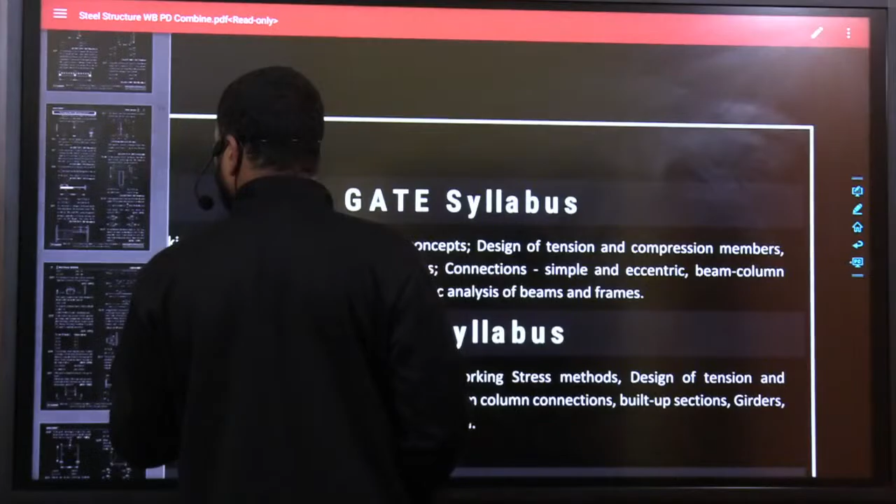Good evening guys. Hi Shihana, good evening. Pradeep, good evening. Two people came, 7 people are watching. One is me, another is Pradeep, another one is Shihana. Who are the other guys? Please do comment. Please keep it up for the sake of God. What do I have to keep up, Suhai? I don't know what I have to keep up. Good evening. Who is that guy? Good evening.

Kuldeep Kumar, good evening. Am I audible guys? And is the visibility good? Please do comment, whether I am audible or not. All perfect? Yeah. Visibility not? What happened to visibility? Anything wrong? I think I am visible here. I can see myself over there. What is the problem with the visibility? Light?

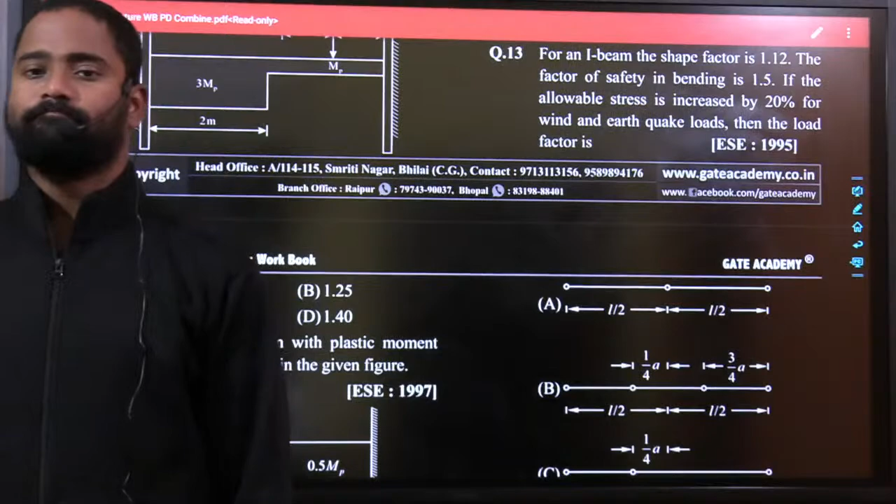I think many people were not there in the morning's class. Sorry for the disturbance. Visible? The writing on the board is not visible. Fine, I'll discuss about that.

Okay, so till now we have seen how to find out shape factor, how to find out plastic moment capacity, how to find out elastic modulus, and how to find out plastic modulus. In the morning I took half an hour of class because many people were not there. As I have already discussed, morning 2 hours, evening 2 hours will be your timetable, 7 to 9. Please like and share with as many people as possible, because I have hardly seen any people in the morning.

Now we'll go for the next type of questions that can be asked. The idea is to find out the collapse load. There are different ways to find out the collapse load, but the major thing, if you want to find out the collapse load, always use the principle of virtual work. We'll be using the principle of virtual work to find out the collapse load.

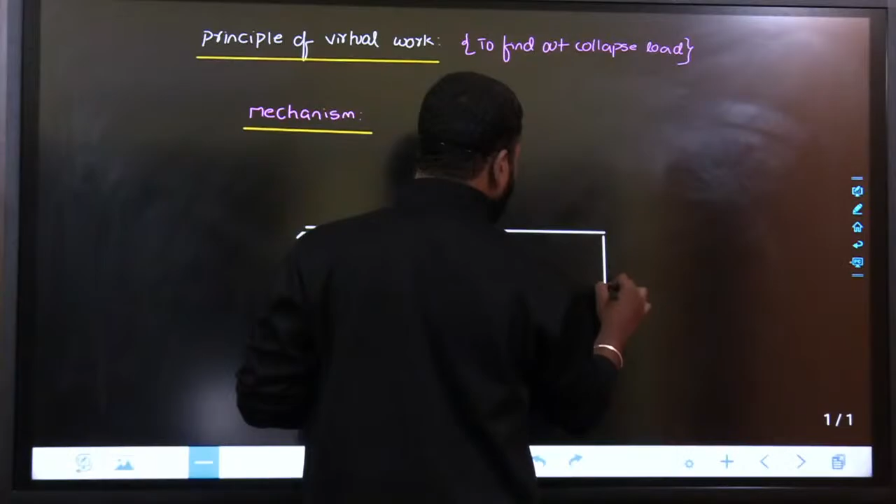To find out collapse load. Before that, we'll see what exactly a mechanism is. Whenever you take any structure, let us say this is a simply supported beam subjected to some loading P.

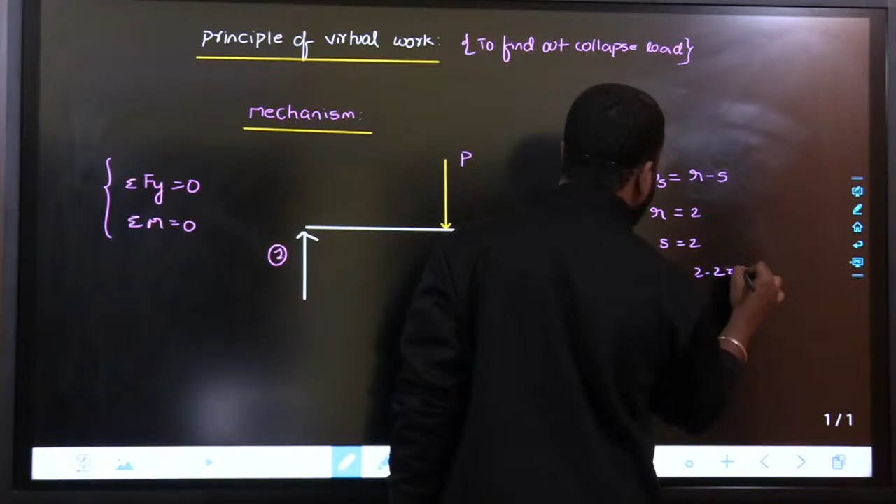What is the static indeterminacy of this structure? ds would be equal to number of reactions minus number of equilibrium equations. If it is subjected to vertical load, then there are only two equilibrium equations: sigma Fy equals 0 and summation of moment equals 0. Generally sigma Fx equals 0 is also an equilibrium equation, but for only vertical load there are only two. And the number of reactions here, this is 1, this is also 1. R equals 2, S equals 2. ds equals 2 minus 2, that equals 0. So ds equals 0. This is statically determinate and stable.

If it is statically determinate and stable, in order to convert this into a mechanism, in order to make it unstable, how many hinges are to be formed? Number of hinges required to convert a structure into a mechanism. That means we are going to convert a stable structure into an unstable structure. Number of hinges required, n, would be equal to ds plus 1, that is 0 plus 1. 1 hinge is required to convert the whole structure into a mechanism.

That means if you take this as a structure, now it is a stable structure. If you keep on increasing the load, what happens? Initially it will bend, right? It will keep on bending like this, and there comes a stage where it will totally collapse. The beam would be totally collapsing like this. So this is how it would be collapsed. That means indirectly a hinge is formed here.

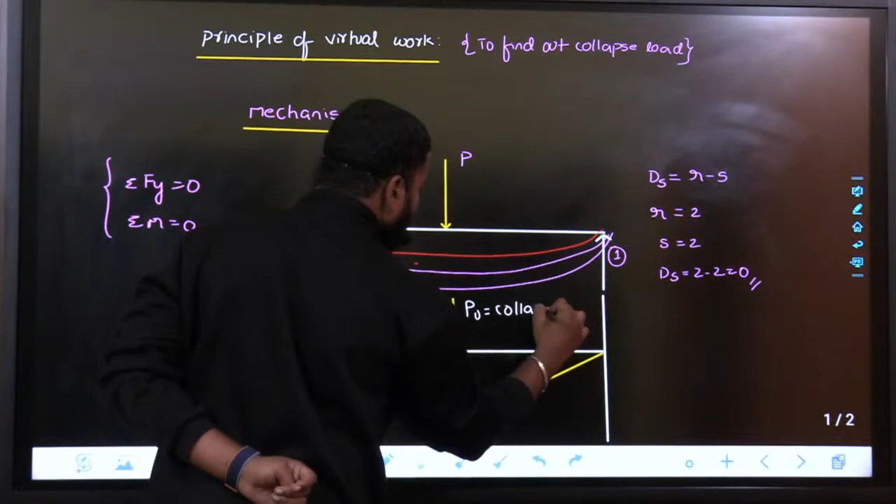The load at which the beam collapses is called the collapse load. You keep on increasing the load and finally it collapses. It bends, and if it reaches up to the plastic moment capacity, it collapses. So this is what you'll be saying: number of hinges required to convert a structure into a mechanism. Mechanism means we are making the structure unstable.

Fine. So here the number of hinges required to convert a structure into a mechanism is generally ds plus 1, where ds is the static indeterminacy. So here the number of hinges required is 1. And the possibility of formation, the location of hinges. Where will hinges form?

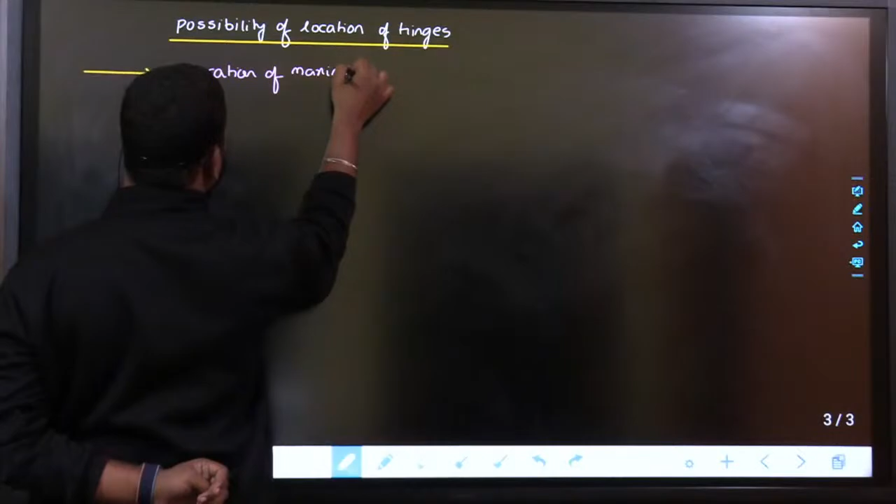So generally, the possible locations of hinges. The first one is the place where the bending moment is maximum. Hinges can be formed at the location of maximum bending moment. Fine. At fixed supports, and under point loads. It can form under point loads.

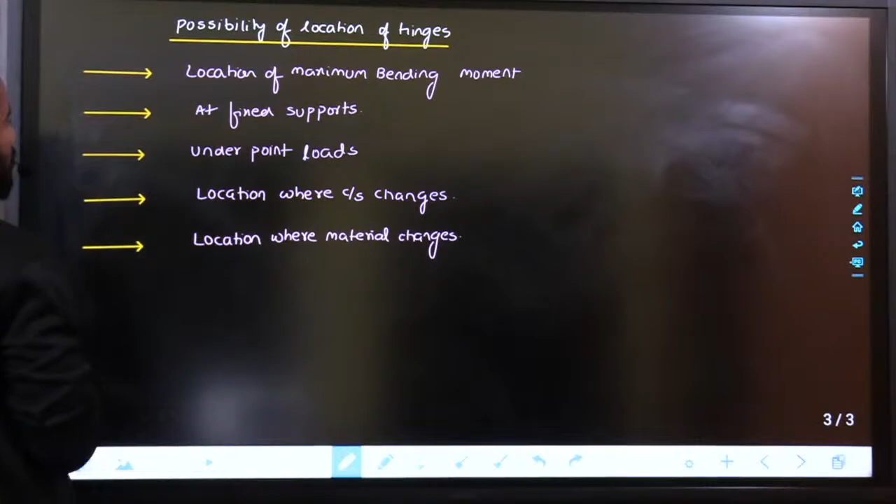Next, locations where the cross section changes, and locations where the material changes. So these are the points: location of maximum bending moment at fixed supports, under point loads, locations where the cross section changes, and locations where the material changes. So these are the possible locations of hinges.

Where will the hinges form? So these are the possible locations of hinges. If you see here, the bending moment is maximum here, and the point load is also here, so the possible location of a hinge would be here. If that hinge is formed, this structure becomes unstable. That means the structure is converted into a mechanism. Fine. Here the structure is converted into a mechanism.

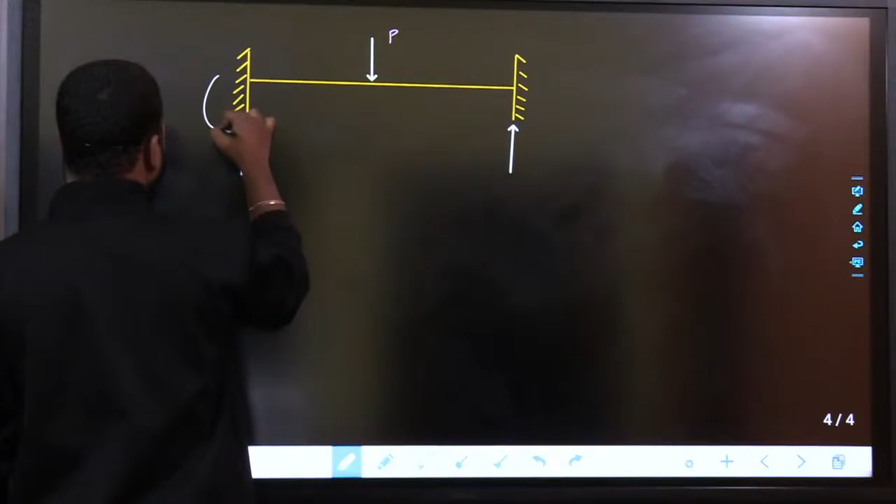Fine. Suppose I take the example of a fixed beam, subjected to a vertical point load P. One reaction will be like this, another reaction like this, and the moments would be something like this. ds would be equal to r minus s. Number of reactions equals 4, number of equilibrium equations, as we have already discussed, equals 2. So the number of hinges required to convert the structure into a mechanism is ds plus 1, that is 2 plus 1, which equals 3. 3 hinges have to be formed.

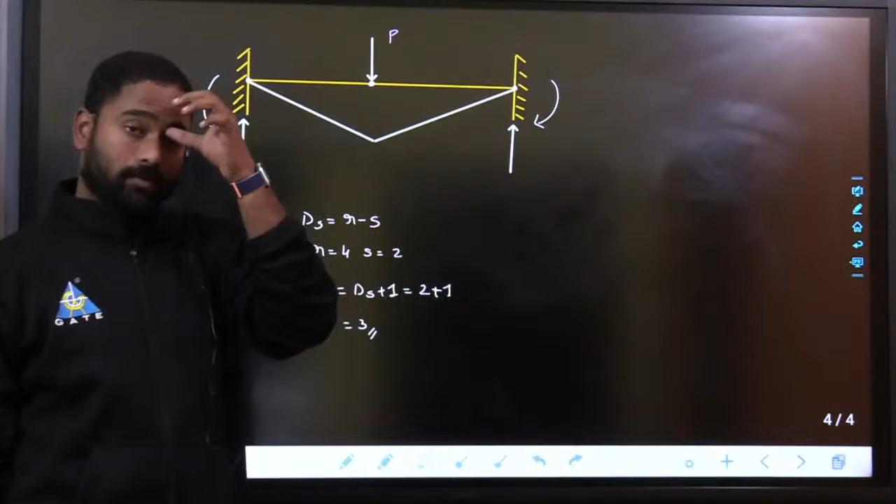What are the possible locations? I told you, first, hinges can form at fixed supports. So here 2 hinges will form, and another hinge might form under the load, that is, at the location of maximum bending moment. That means if the structure fails, it will fail something like this. 3 hinges will be formed so that the structure is converted into a mechanism. Fine.

Fine. Now the next one is how to find out the collapse load. I told you we will be using the principle of virtual work to find the collapse loads. Collapse load means the load at which the material fails or the structure is converted into a mechanism. You can use the equilibrium concept, the mechanism concept, and other concepts, but first I will discuss how to find the collapse loads using the principle of virtual work. What does the principle of virtual work say?

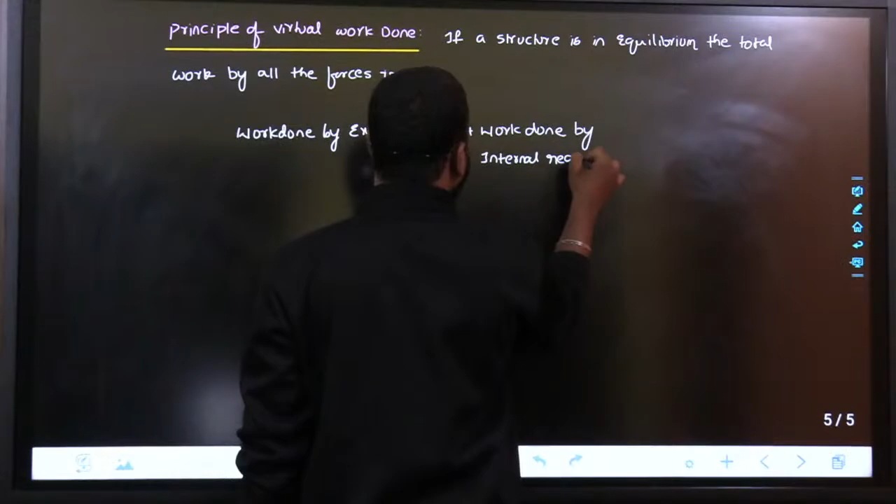If a structure is in equilibrium, then the total work done by all the forces is 0. That means work done by external forces plus work done by internal reactions equals 0. Work done by external forces plus work done by internal reactions equals 0. This is the principle of virtual work.

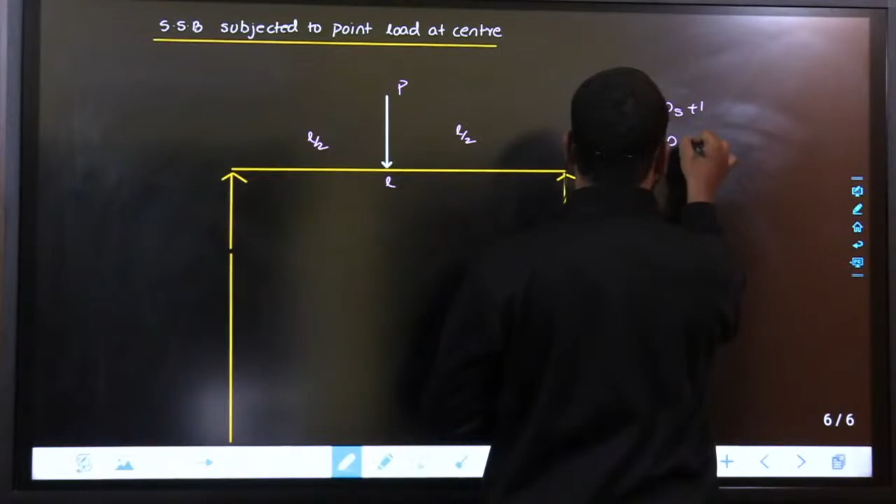Now how will you use this principle of virtual work? I'll take a simply supported beam subjected to a point load at the center. I am just considering a simply supported beam of length L, subjected to a point load P at the center, so this is L by 2, and this is also L by 2. The number of hinges required to convert the structure into a mechanism would be N equals ds plus 1, and this is a statically determinate structure, so 0 plus 1, which equals 1. The number of hinges required to be formed is 1.

Fine, number of hinges required to be formed is 1. Then what you can say over here is, hinge will be formed, let us say at C. If I take this as A, C, B, hinge will form at C. Just before collapse, it would be something like this. It will try to rotate something like this just before collapse. Fine, a hinge is formed over here.

That means the moment resisting capacity would be MP. This is MP, this is also MP, and let us say this is L by 2, this is L by 2, this is theta, this is also theta. Fine. So what is external work done? Load multiplied with distance in the direction of the applied load. If this is L by 2, this is theta, I can write this as L by 2 times theta.

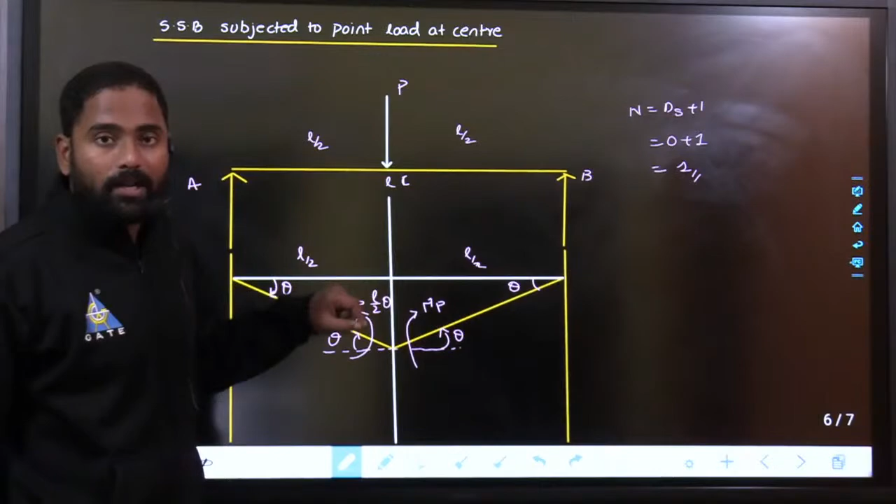If this is theta, this is L by 2. If I take this as y, tan theta equals y upon L by 2. For small values of theta, tan theta is approximately equal to theta. Theta equals y upon L by 2. This implies y equals L theta by 2. So this is L theta upon 2. Fine, this distance is L by 2 times theta or L theta upon 2. So external work done by external forces is Pu into L by 2 times theta, right?

Work done by external force equals Pu or P multiplied with L by 2 times theta. Okay, and what is work done by internal force? Work done by internal force is MP is anti-clockwise and theta is clockwise, so it is opposite. MP into theta, both are opposite, so minus MP into theta and minus MP into theta.

See, if load is trying to push it like this, the internal rotation, that means capacity, will try to resist this. If this tries to rotate like this, this tries to resist. That is the reason here it is clockwise moment, here it is anti-clockwise moment, whereas rotation is clockwise here, rotation is anti-clockwise here. So internal work is minus MP into theta minus MP into theta, because moment and theta are in opposite direction.

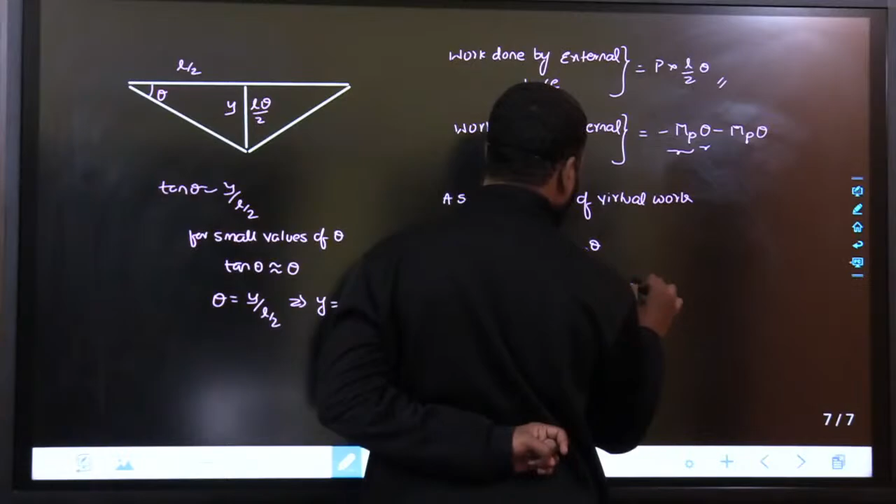So as per principle of virtual work, what I can write is P multiplied with L by 2 times theta equals 2 MP theta. So P equals 4 MP upon L. Collapse load is 4 MP upon L, whereas MP equals plastic moment capacity. P equals 4 MP upon L. This is the collapse load.

Plastic moment capacity is constant for a given section, right? It depends upon Fy multiplied with Zp, constant for a given cross sectional area. Fine. So this is how we are going to find out the collapse load. So whenever any problem is given to you, try to use principle of virtual work. Work done by external forces equals work done by internal forces.

What is work done by external forces? For that, first you should find out number of hinges that is to be formed to convert a structure into mechanism. Once this is converted, work done by external forces is P into L by 2 times theta. Work done by internal forces or reactions is minus MP into theta minus MP into theta. This is internal reactions. So as per the principle of virtual work, the collapse load is given as 4 MP upon L. This is for simply supported beam subjected to point load at the center. Any doubts in this? You can ask me.

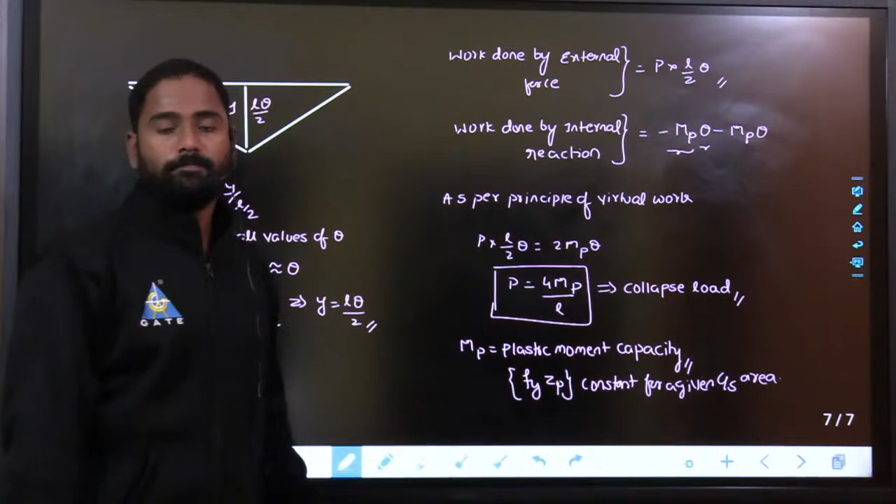Good evening. Only 4 people are watching, so you are getting bored.

Work done by internal reactions again. See Prithvi, if a load is being applied like this, load tries to rotate this. Fine. Internal reaction, that means there is some moment. If a load is being applied, I am trying to rotate like this. If there is any fixity over here, I'll resist it. That means if you try to rotate it like this, I'll resist it. So here a moment is developed, right? That is plastic moment capacity, your capacity.

The capacity of beam is generated here, MP, right? So MP multiplied with theta, this is clockwise moment and there is anti-clockwise rotation. So work done by internal reactions is negative, because MP and theta are in opposite direction. Generally work done by any force is load multiplied with distance traveled. So MP multiplied with theta, MP multiplied with theta. Here because there are 2 reactions that are developed, so 2 MP into theta. Any doubts?

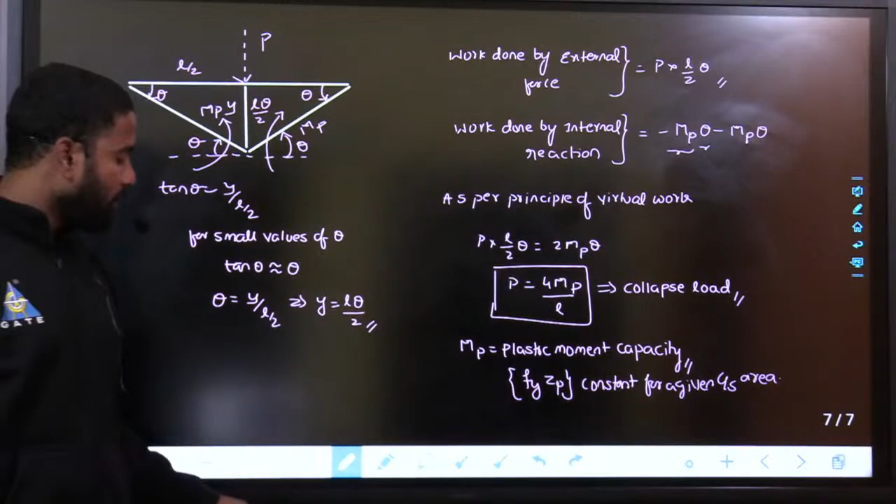Only 4 people are watching. Yeah, thank you very much.

Any doubts, guys? Got it?

No doubts? Fine. In the same line, if you want to find out for a simply supported beam subjected to UDL, W kilonewton per meter, let us say. Then the number of hinges required to convert this into a mechanism is n equals ds plus 1. ds anyway equals 0, so n equals 0 plus 1, so n equals 1. The number of hinges required to be formed is 1.

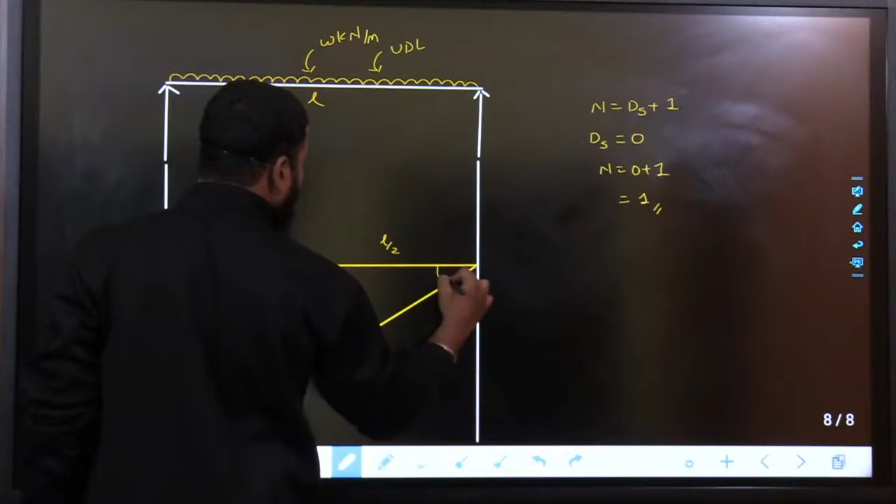Generally moment will be more at the center. What is that? WL square upon 8. So the hinge will form exactly at the center. Fine. So if this is L, this is L by 2, this is also L by 2, this is theta, this is also theta rotation. But here the only thing is the load is W kilonewton per meter.

So if you want to find out work done by external force, that is load multiplied with this whole area, you have to take. This whole area, that means this is L by 2 times theta. So external work done equals load multiplied with area. Area under the load is half multiplied with L multiplied with L by 2 theta.

And internal work done would be MP times theta plus MP times theta. Fine. So WL square by 4 equals 2 MP theta. So W would be equal to 8 MP upon L square. Therefore the collapse load for a simply supported beam subjected to UDL is 8 MP upon L square.

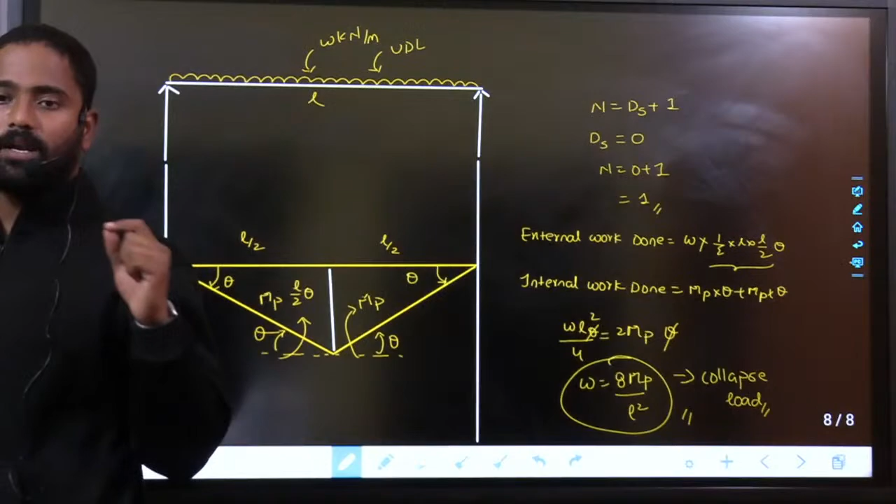So any doubts over here? Prithviraj is saying no doubt. Hey Suhani, rather your videos are much more helpful for us. Please make more videos on this subject and complete our ERC syllabus, please. Humble request. Written on board is not visible, sir. Not clearly visible, blurred. Why is it blurred here? Lighting effect is high.

Anyway guys, any doubts in this? This is your case 2, simply supported beam subjected to UDL. Case 1, simply supported beam subjected to point load. Case 2, simply supported beam with UDL. Next, case 3. Case 3 is simply supported beam

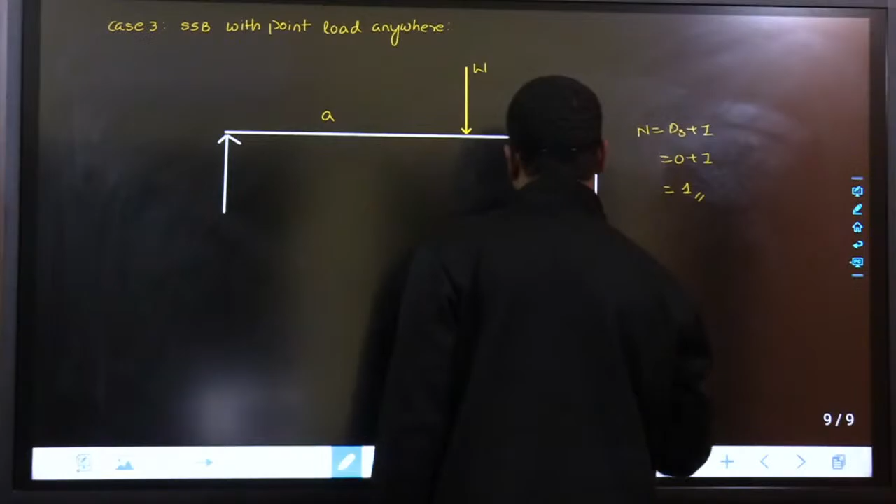with point load anywhere. Okay, simply supported beam with point load anywhere. How exactly are you going to find that out? Let us say the point load is somewhere here, this is A, this is B, capital W. Number of hinges required to convert this into a mechanism, n equals ds plus 1, ds equals 0, plus 1, that equals 1. n equals 1, not a bigger issue.

Fine. So if n equals 1, the hinge will be formed under the load. Always remember, maximum bending moment will be under the load only. So the hinge will form under the load. Fine. So if hinges form something like this, this is A, this is B. Now the angles will not be the same. This will be alpha, this will be beta. So this is A alpha, this can also be B beta. And plastic moment capacity MP will be like this. If this is alpha, this is also alpha, this is beta, this is also beta.

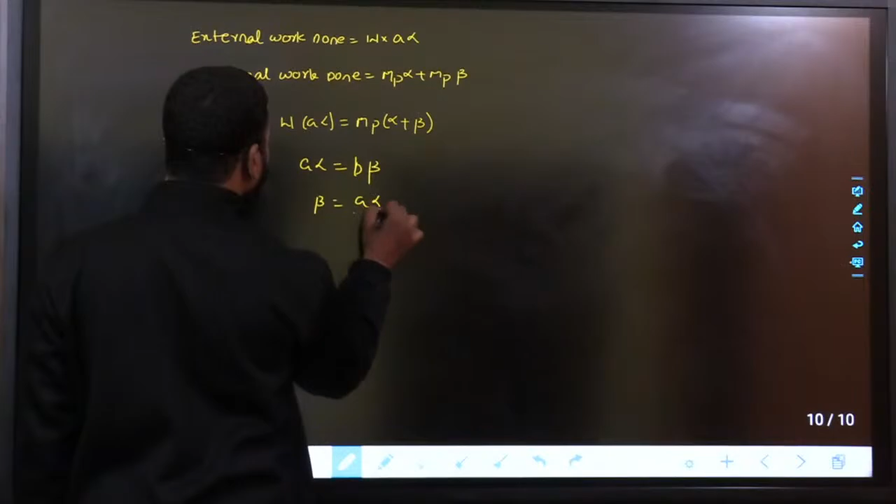So what is external work done? External work done would be equal to load multiplied with distance travelled, that is A alpha. Internal work done would be equal to MP times alpha plus MP times beta. So W multiplied with A alpha equals MP times alpha plus beta. And what you can write is A alpha equals B beta, so beta would be equal to A alpha by B. W into A alpha equals MP multiplied with alpha plus A alpha by B.

W would be equal to MP multiplied with (b plus a) upon ab. b plus a is L, so MP L upon ab. Fine. This is how you will calculate W. This is the collapse load for a simply supported beam with point load anywhere. Any doubts in this?

You can ask me. Any doubts? Please go ahead and ask me. Any doubts, guys? Only 6 people are watching. I don't know why you got bored of it. So please do comment. Good evening, Prudviraj. Only Prudviraj is constantly messaging me. What about the other guys? Please do comment, guys.

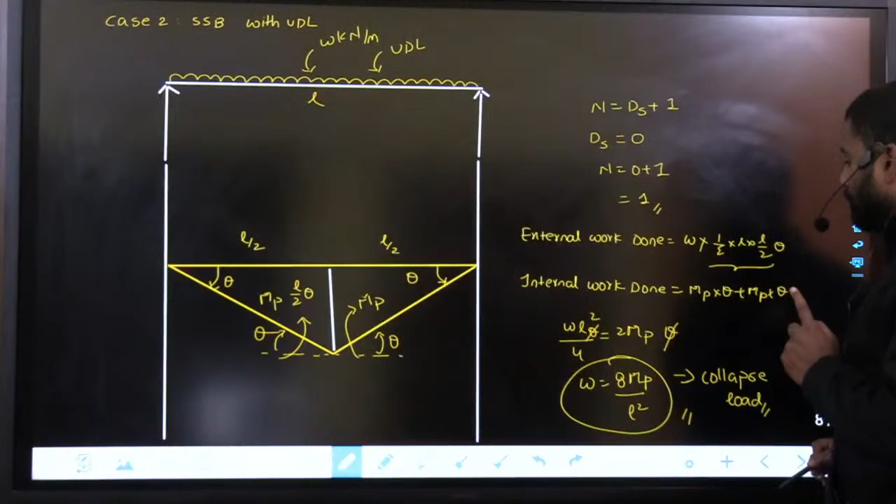So in a simply supported beam with point load at the center, collapse load is 4 MP upon L. With uniformly distributed load, 8 MP upon L square. With point load anywhere, MP L upon a into b. Fine. Simply supported beam is completed. Next we go for fixed beam.

So fixed beam, case 1, fixed beam with point load at center. Right? So fixed beam with point load at center. P will be acting over here. This is load P. Now this is a fixed beam.

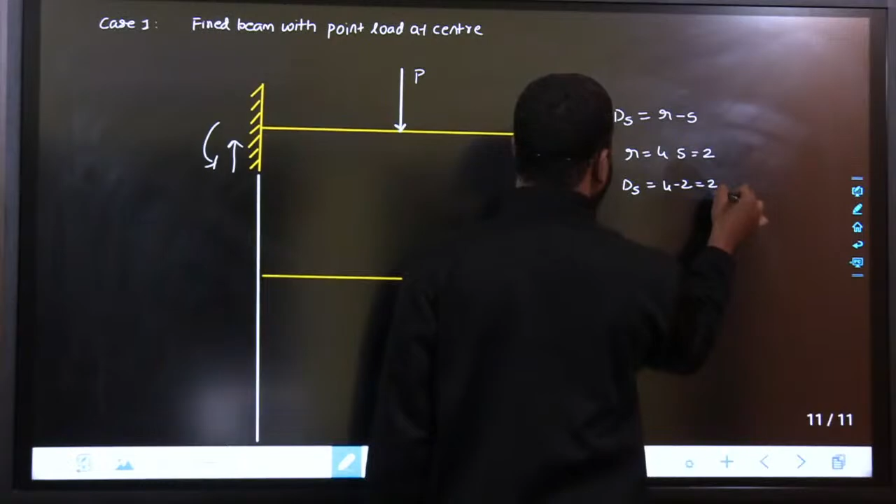So what is static indeterminacy for a fixed beam subjected to vertical loads only? Here there will be one reaction, here one reaction, here one reaction. Number of reactions is 4, number of equilibrium equations equals 2, so Ds is 4 minus 2, that is 2. Number of hinges required to be formed is Ds plus 1, that is 2 plus 1, 3. 3 hinges are to be formed.

And where will these 3 hinges be formed? If you remember, I told you hinges will be formed at fixed supports, under the load, and at maximum bending moment. And if there is any change in cross section or any change in the material, those points you have to check. Now if this is load P exactly at center, L by 2, L by 2, it will form at A, B, C. Plastic hinges will form at A, B and C.

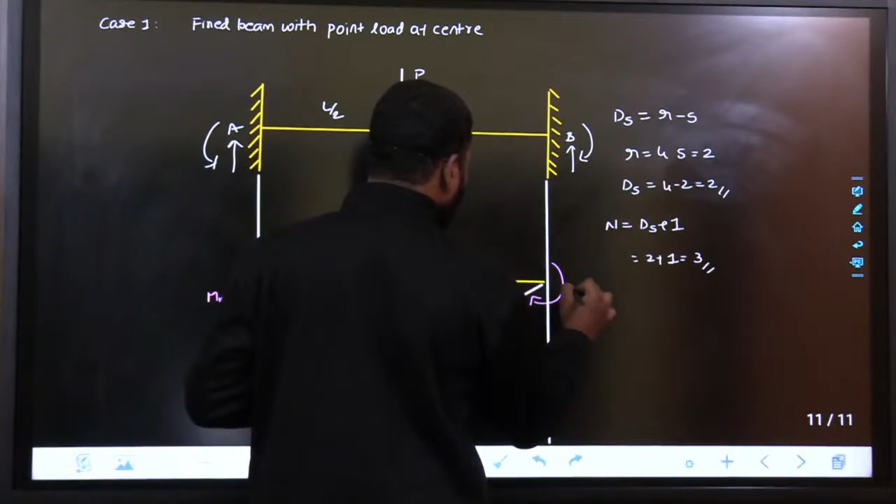That means the final collapse diagram would be something like this. Here there is a plastic moment capacity of MP, here another MP, here MP, and here MP that will be generated. If this is theta, this is also theta, then this would be L by 2 times theta. Why? A hinge is developed here, a hinge is developed here, so plastic moment capacities will be developed here. This load tries to rotate it like this, and the fixed support tries to resist it. If it is a hinge, it is easy to rotate. That's why moments are developed over here, whereas here moments are developed at different locations. I'll say this as theta, this also as theta.

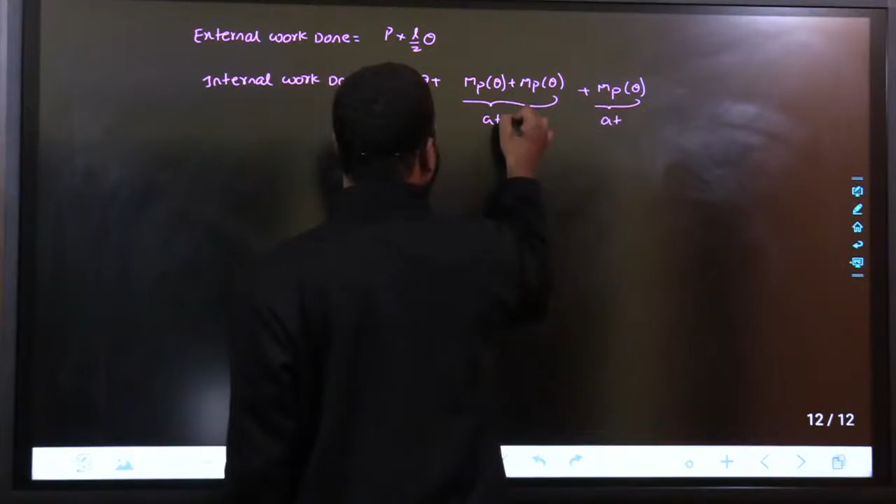So what would be the external work done? External work done equals P multiplied with L by 2 times theta. Internal work done equals MP times theta at A, MP times theta plus MP times theta at C, plus MP times theta at B. So totally, P multiplied with L by 2 times theta equals 1, 2, 3, 4, that equals 4 MP into theta. So P would be equal to 8 MP upon L. So the collapse load for a fixed beam subjected to point load at center is 8 MP by L. If it is a simply supported beam, then it is 4 MP upon L.

If it is a fixed beam, then it is 8 MP upon L. So collapse load for a fixed beam subjected to point load at center is 8 MP upon L. Fine. So this is how you will calculate. And how the hinges are formed, that means in what way hinges are formed, that depends actually on bending moment diagram.

If it is a fixed beam subjected to point load at center, from your strength of materials concept, the moments developed at the ends, fixed end moments, would be WL upon 8 and WL upon 8. This is fixed end moments, P or W, whatever that is. The fixed end moments that is developed is WL by 8.

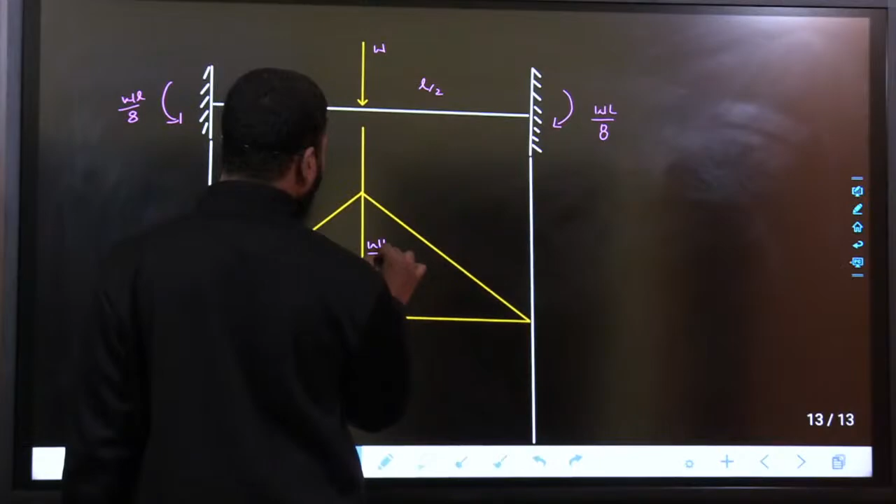If there is no fixed supports, if there is only hinge support, then bending moment diagram would be how much? At the center it is WL by 4, right? This is BMD. Now the moments developed because of load applied, the moments developed at the ends is WL by 8. If this is positive bending moment, this is negative. Because of load it bends like this, sagging, and because of end moments it is hogging, negative. Fine. So this is negative, WL upon 8, and this is also WL upon 8.

The positive bending moment, what would be this value? WL by 4 minus WL upon 8. This would be WL upon 8. This is maximum positive bending moment and this is maximum negative bending moment. This is from your bending moment diagram concept, which you might have studied in your structure analysis. This triangle is a BMD with point load at the center for an SSB, simply supported beam.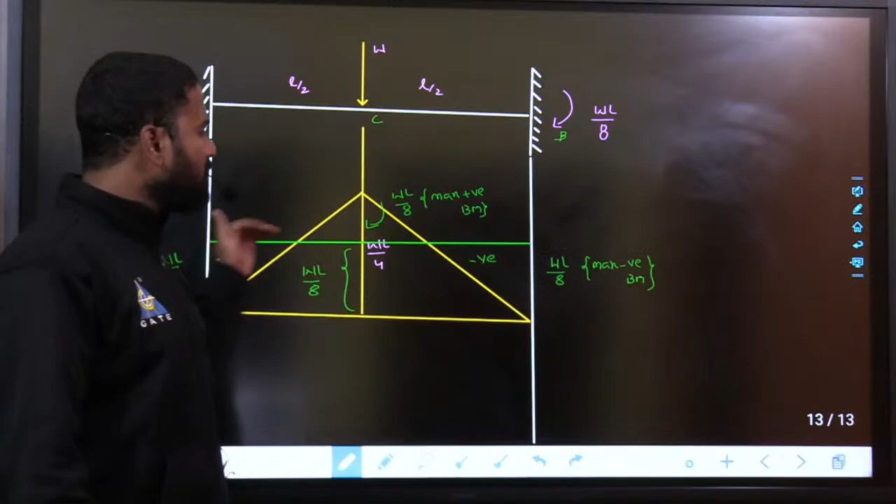If you are providing the fixity at the ends, then you will be adding these moments, minus WL by 8. So maximum negative bending moment at A and B is WL by 8. At C, the maximum positive bending moment is WL by 8. At all the 3 points, hinges will be formed together. That means maximum bending moment is same at 3 locations. So all three hinges will form together.

At A, B and C, since maximum negative bending moment equals maximum positive bending moment equals WL upon 8. So since bending moments are same, when you keep on increasing the load, at the failure all hinges will be formed and failure occurs. And what is the collapse load? Collapse load is 8 MP upon L. Fine. Any doubts in this? You can ask me.

Namaskaram. You are late to the class.

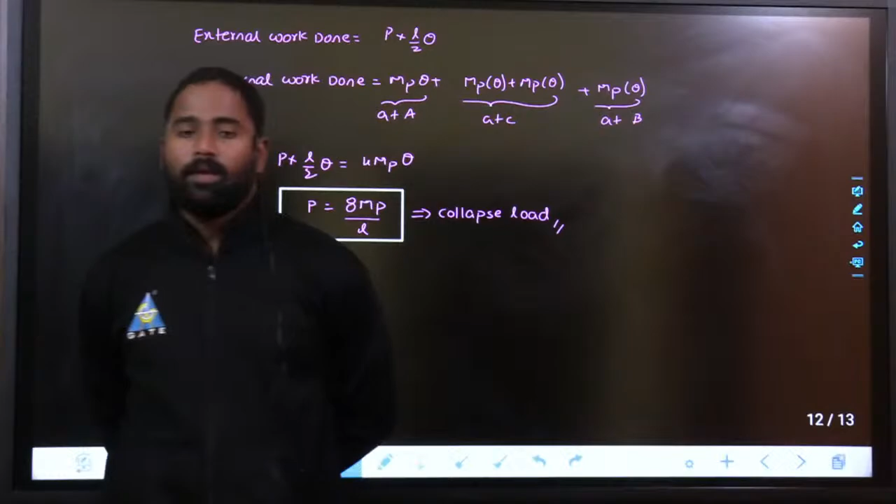See, the concept is very much simple. Whenever, just find out number of hinges required to be formed and location of hinges. So here these are the three locations of hinges, and finally you can find out what is the collapse load that is required. And hinges will be formed simultaneously at A, B and C.

Any doubts, guys? Only Prithviraj is commenting. What about the other guys? If you are having any doubts, please go ahead and ask now, because this is the time where you can clear the doubts. If you don't clear doubts now, then it would be difficult. If you want me to repeat, I'll repeat. Since it is starting, I know it is difficult to take, be with the pace. So if you are having any doubts, please go ahead and ask.

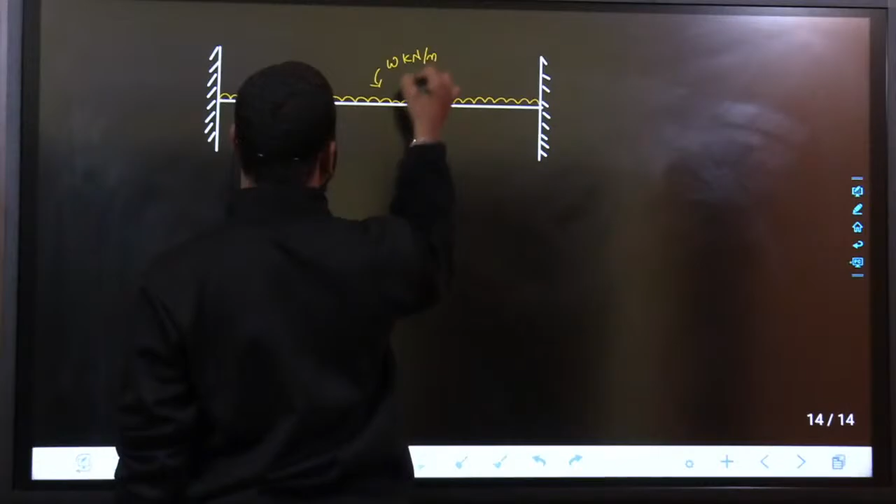Fine. Next concept would be fixed beam subjected to UDL. Fixed beam subjected to UDL of W kilonewton per meter, length L. Then what is ds? ds will not change. That is static indeterminacy, ds equals 2. Number of hinges required to be formed is 2 plus 1, that equals 3. So it will form at A, B and C. C would be exactly at the center, because maximum bending moment will be at the center. So it will be something like this.

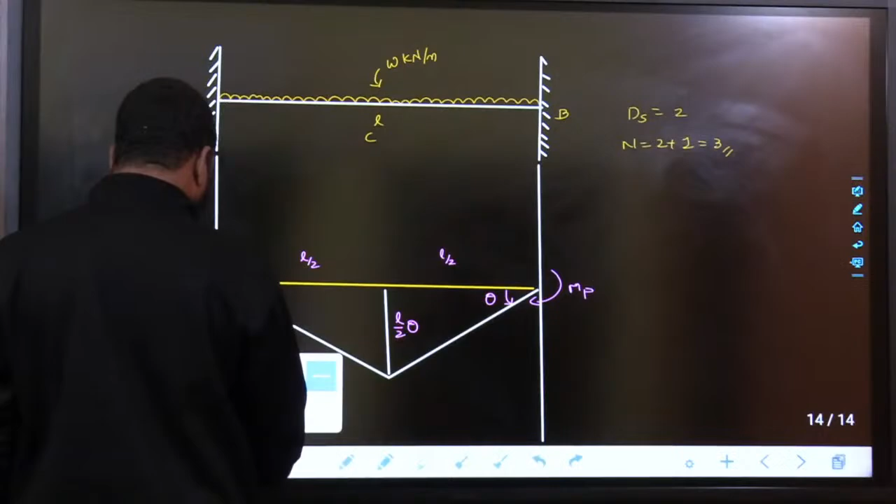This is theta, this is also theta, and the length is L by 2 times theta. This is L by 2, this is also L by 2. Here the moment developed is MP, here also the moment developed is MP, and here the moment developed is MP. And this is theta, this will also be theta.

Fine. So what I can write down is, what is the external work done when UDL is applied? Load multiplied with area. So external work done equals load multiplied with area, half multiplied with L by 2 times theta. And what is internal work done? Internal work done equals MP into theta plus MP into theta plus MP into theta plus MP into theta. This is at C, that means exactly at the center, and this is at B.

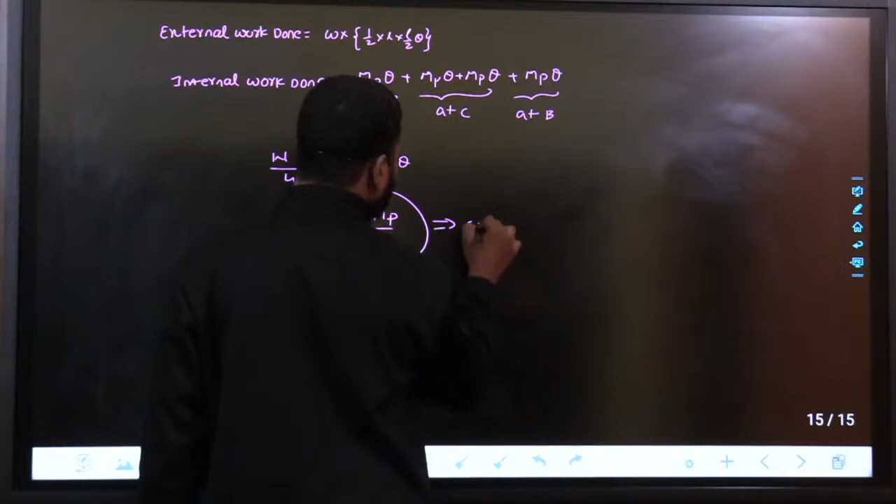So the value would be WL square by 4 times theta equals 4 MP theta. So W would be equal to 16 MP upon L square. This is the collapse load. Collapse load for a fixed beam subjected to UDL is 16 MP upon L square.

Fine. Any doubts? Only 6 people are watching. Today, not even 10 people were present. What happened? I think people got bored, or is there any issue? Any doubts, guys? Please do comment. 8 people are watching. If you comment, then only I can understand whether you understood the concepts or not. In the early morning class, I took class at 7 a.m. and there were hardly 1 or 2 people, and I stopped taking class after half an hour, because I don't know whom I am teaching. I asked you whether 7 to 9 timing is okay. If you want me to change the timings or the subject, I'll change them. So please be clear, what do you want?

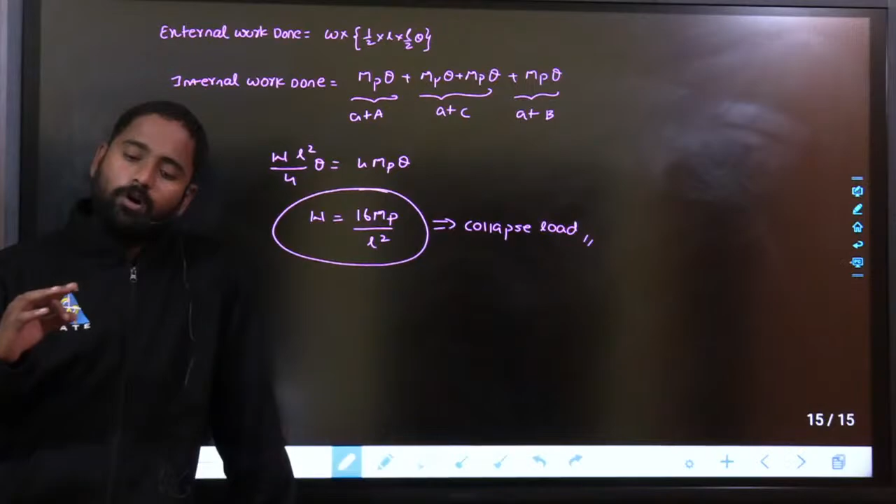This is one of the opportunities for revision. I don't want to revise for myself, I want you people to revise. I want to help you out to revise, that means what to study, what not to study, and what the major topics are. I am discussing only the major topics here, so that if you are able to solve previous years' GATE questions properly, then automatically you will score 60 plus marks. If you solve previous years' questions of all the subjects, you will score 60 plus marks. If you are clear with all the concepts, you will score 80 plus marks. And if you know how to apply, you will get 90 plus marks. As simple logic as that.

Fine. So please do comment. Please do keep on commenting. If you want me to repeat, I'll repeat, because this is the time where you can ask me. I can take another 5 minutes and repeat. But if you don't ask me, I can't repeat. So that is the collapse load, 16 MP upon L square. Any doubts, you can ask me. So someone said no doubts. Continue with steel, sir. Fine. I don't know why people are laughing. It's nice to have a laugh, at the same time it's better to read.

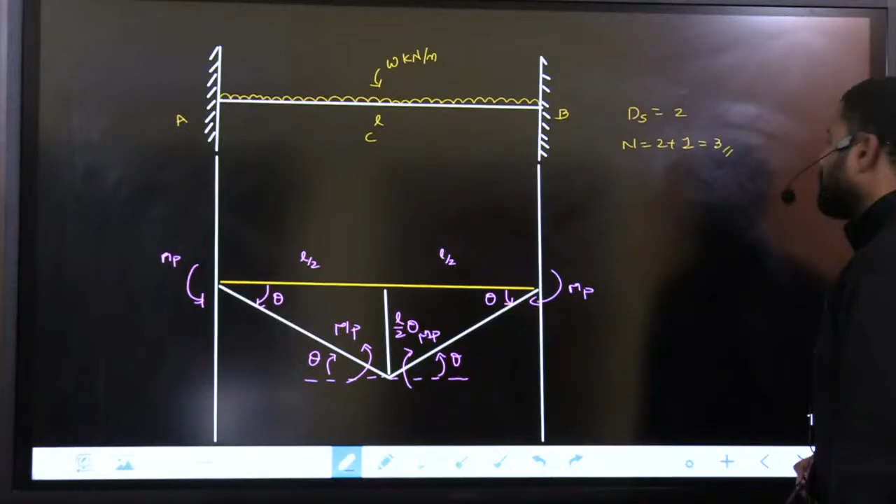Now, collapse. Three hinges are formed when it is subjected to UDL, right? How are the hinges formed? As I said, whether all the hinges are formed simultaneously, or whether they form in a different fashion. For that, you should draw a bending moment diagram.

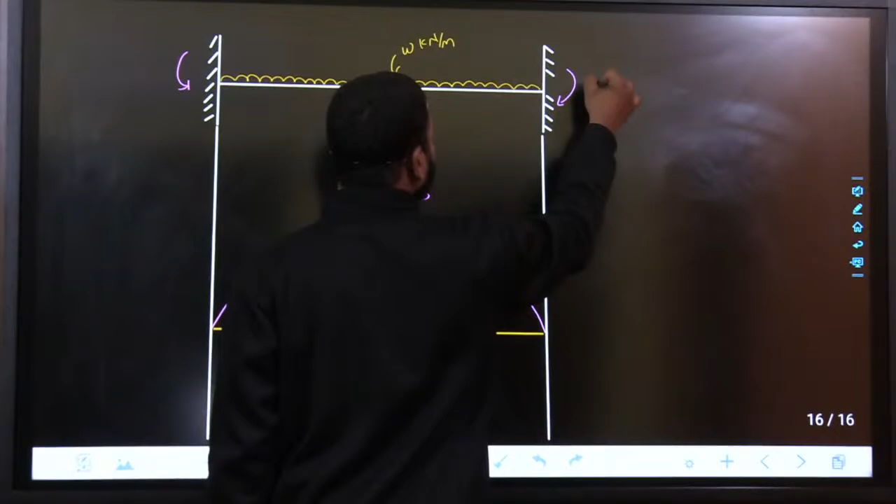Generally, for a simply supported beam subjected to UDL of W kilonewton per meter, the bending moment diagram would be something like this, with a maximum of WL square upon 8. Next, what are the moments developed here? The fixed end moments are WL square upon 12. If these are your fixed end moments, then the bending moment would be something like this. This is negative, this would be positive, this is negative. This is the final bending moment diagram, WL square by 12 here, WL square upon 12 here. And here, what would be this value?

See, this whole value is WL square upon 8. This is WL square upon 12. This would be WL square by 8 minus WL square by 12, that is WL square by 24. Only this value is WL square by 24. Maximum negative bending moment is WL square by 12, and maximum positive bending moment is WL square by 24.

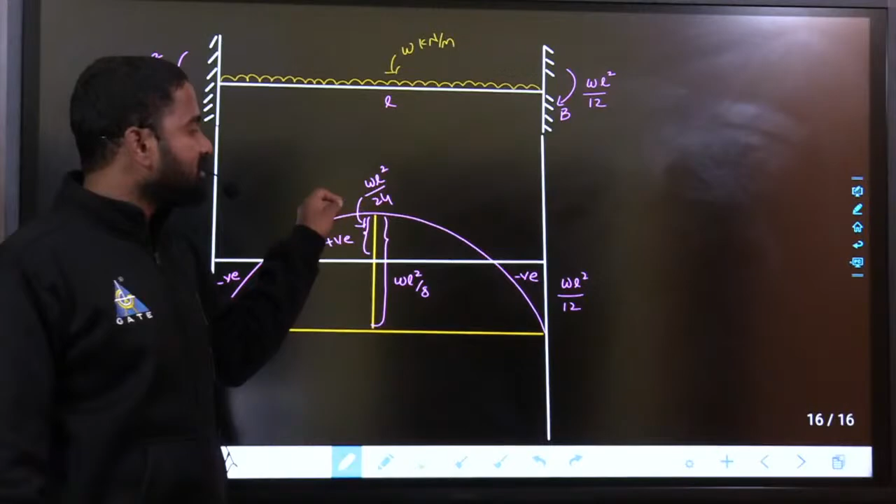Since bending moment is more, first hinges are formed at A and B. That means at fixed supports. First hinges are formed at A and B. Next, if you further increase the load, then hinge will form at C, because bending moment at C is less compared to that of A and B. So the note would be

Since negative bending moment is high at A and B, first hinges are formed at A and B simultaneously, followed by hinge at C. That is maximum positive bending moment. So at C, at 16 MP by L square, hinges are formed simultaneously.

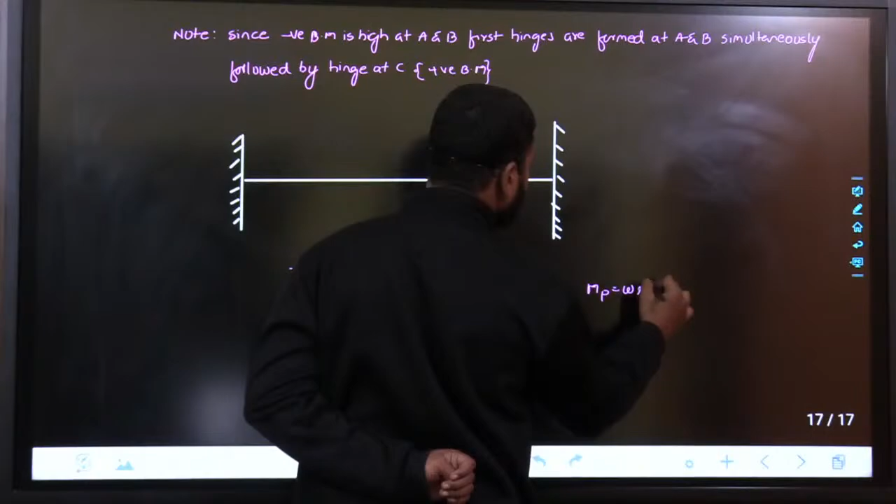First hinges are formed at A and B, because negative bending moment is maximum, WL square by 12. WL square by 12 equals MP. Since hinges are formed at a moment of WL square by 12, the load at which hinges are formed at A and B, how you are going to find out, is MP equals WL square by 12. W would be equal to 12 MP upon L square. At a load of 12 MP by L square,

If you keep on increasing the load up to 12 MP by L square, hinges are formed at A and B. Now, if you increase this to 16 MP by L square, then hinges are formed at A, B and C. You can see that collapse load is 16 MP by L square. If it is up to 12 MP by L square, hinges are formed at A and B. If you increase this to 16 MP by L square, hinges are formed at A, B and C. That means next hinge will be formed at C.

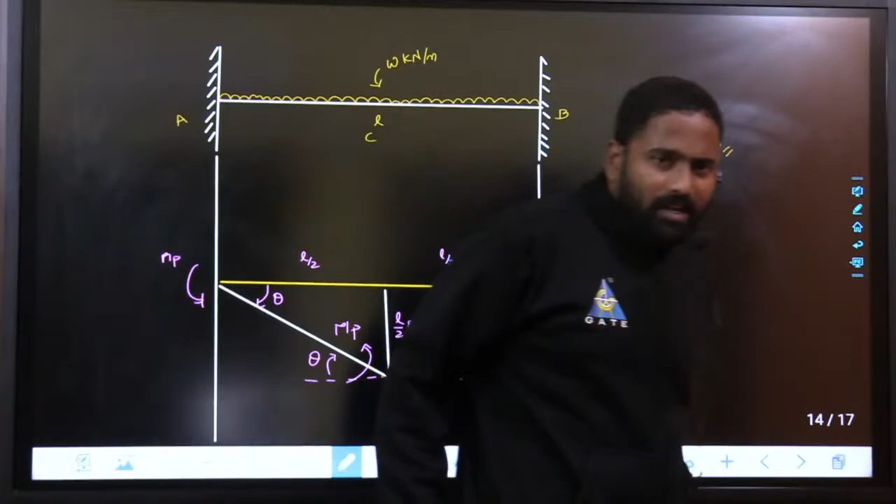Any doubts in this? You can ask me. Any doubts? Only 4 people are watching. I don't know where people went. Only 4 people are watching. 5 people. I think you people are getting bored. I have to do something. Let me think about it. Nothing is coming in my mind. Any doubts in this, guys? One person, Prithvi Raj, no doubt. Thank you, Prithvi. At least you are commenting. There are no other guys. I don't know who are those 3 or 2 guys. Rest of the people left.

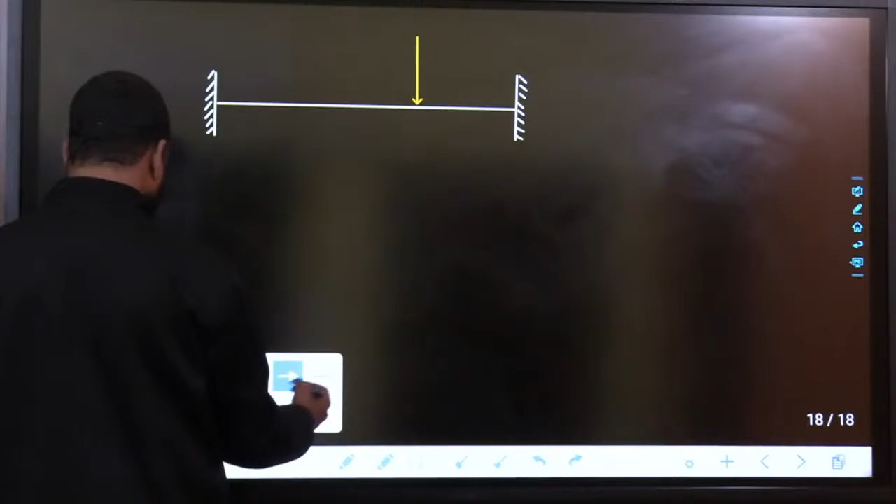This is 12 MP by L square. I mean, this is how hinges are formed. Next is fixed beam with point load anywhere. Number of hinges required to be formed is 3, that is, degree of static indeterminacy would be equal to 2. That will not change.

If I take this as A, this is B, this is W, with A and B as distances, alpha and beta as rotations, so A alpha and B beta, and this is MP. This one is also MP, this one is also MP, and this is also MP. This is beta, this one is alpha. Anyway, third hinge will be forming under the load only.

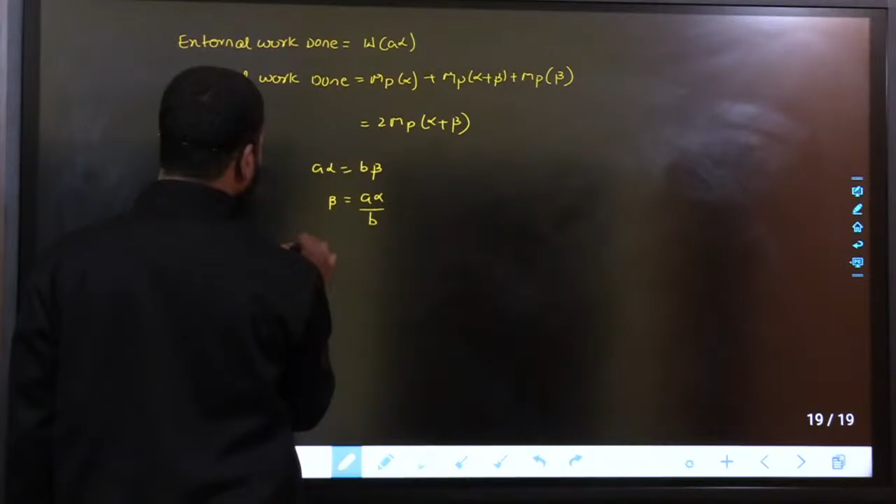External work done equals W multiplied with A alpha. Internal work done equals MP multiplied with alpha plus MP multiplied with alpha plus beta plus MP multiplied with beta. So this equals 2MP times alpha plus beta, and we know A alpha equals B beta. Beta would be equal to A alpha upon B. So W times A alpha equals 2MP times alpha plus A alpha by B. So that equals 2MP times B plus A upon B alpha.

W multiplied with A alpha. So W would be equal to 2MP L upon AB. W equals 2MPL upon AB. This is the collapse load. Simple. Collapse load.

If it is the collapse load, then how will the hinges be formed? Generally, because of the loading, here moment would be less, W B square A upon L square, and here moment will be more, W A square B upon L square. So first plastic hinge will be forming at B. Next it can be at A and C, depending upon the values of moments at A and C.

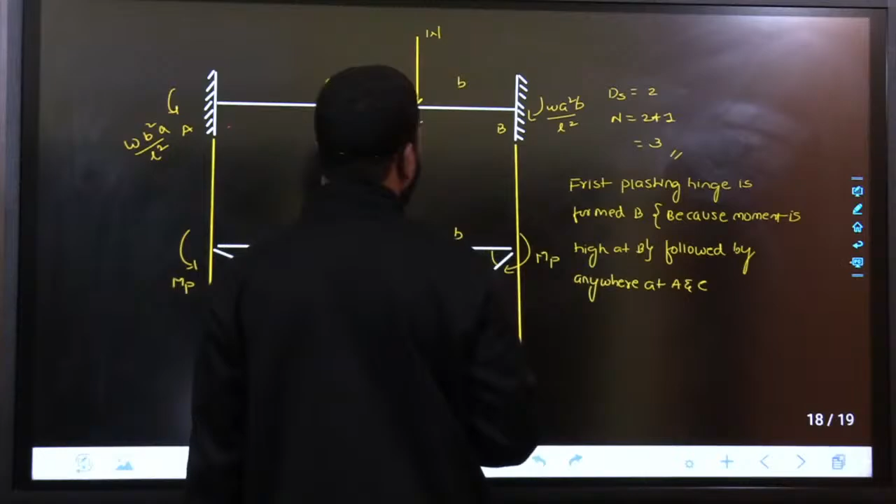So first plastic hinge is formed at B. Why, sir? Why at B? Because A value is more than B, W A square B upon L square. Moment is high. If load is near to A, then moment will be high at A. So accordingly you have to judge. Here first hinge is formed at B, because moment is high at B, followed by anywhere at A and C, depending upon values of moments at A and C.

Depending upon values of moments at A and C. If moment at A is more, it is formed at A. If moment at C is more, it is formed at C. Any doubts in this? You can ask me.

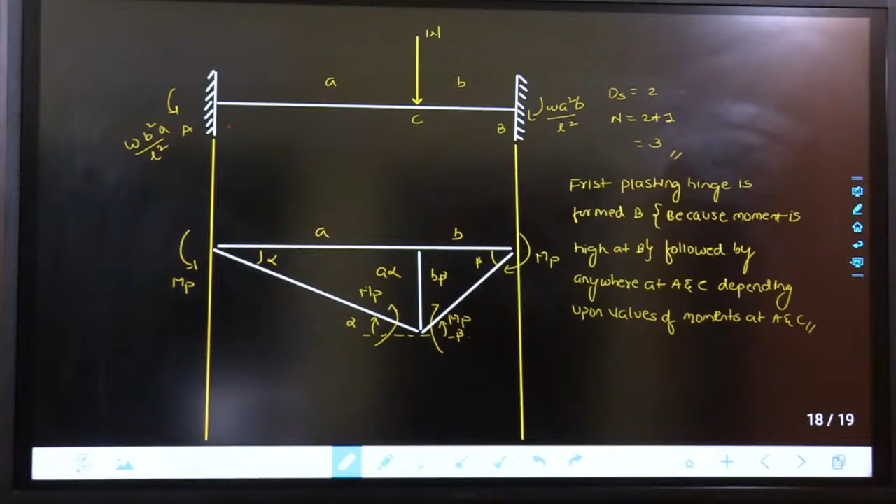Two people commented clear sir, clear sir. What about the other people? If it is not clear to you, you can tell me, no issues. Fine. And I told you, if there are any cross-sectional changes or material changes, the plastic hinge can also form over there.

That means if load is being applied over here, the number of plastic hinges required to be formed is 3, right? Ds equals 2, so the number of plastic hinges required is 2 plus 1, that is 3. What are the possible locations? It can form here, here, here, and here. 4 locations it can form. So you have to check all types of failure mechanism. First of all, check formation of plastic hinge under the load. Check this criteria. Next, at the location where material changes, check that criteria also.

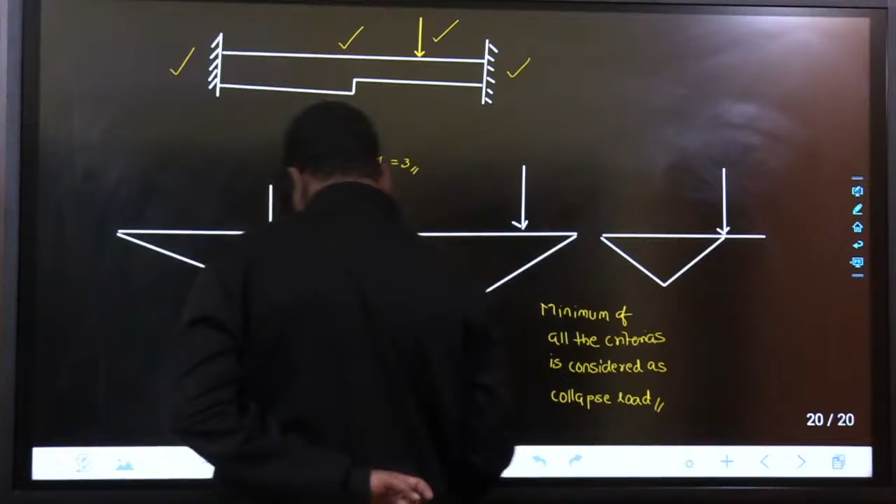Fine. Next, at these 3 locations, check this criteria also. Or check this criteria also. These 4 criteria you have to check, and the minimum of all the criteria is considered as collapse load. You have to check all the criteria, and the minimum of all those will be considered as your collapse load. Okay. Any doubts up to here?

You can ask me. Any doubts up to here, guys? If there is no doubt, we'll try to solve some of the questions.

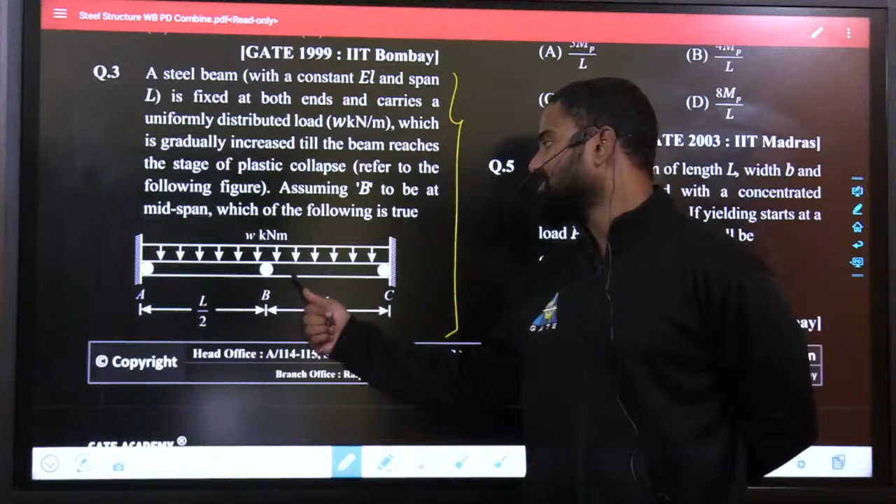The question is, a steel beam with a constant EI and span L. Question number 3, this one. A steel beam with a constant EI and span L fixed at both ends carries a uniformly distributed load which is gradually increased till the beam reaches the stage of plastic collapse. Assuming B to be at midspan, which of the following is true? A fixed beam subjected to UDL and point B is at the midspan, A and C are at the fixed supports. He is asking which of the following statements is true.

Hinges are formed at A, B, C together, that is option A. Hinges are formed at B and then at A and C. Hinges are formed at A and C together, then at B. Hinges are formed at A and C only. What is the answer? Prithviraj, once you solve the problem, you will understand. First, try to solve this problem.

Fixed beam subjected to UDL, A and C are at the ends, B is at the center. So he is asking how hinges are formed. Hinges are formed at A, B and C simultaneously. Hinges are formed at B and then at A and C together. Hinges are formed at A and C together, then at B. Hinges are formed at A and C only. What is the option? Option C.

So I have discussed that. First, hinges are formed at A and C at 12 MP by L square. And if you increase the load up to 16 MP by L square, a hinge forms at B. So first hinges are formed at A and C, then at B. I have discussed that just now.

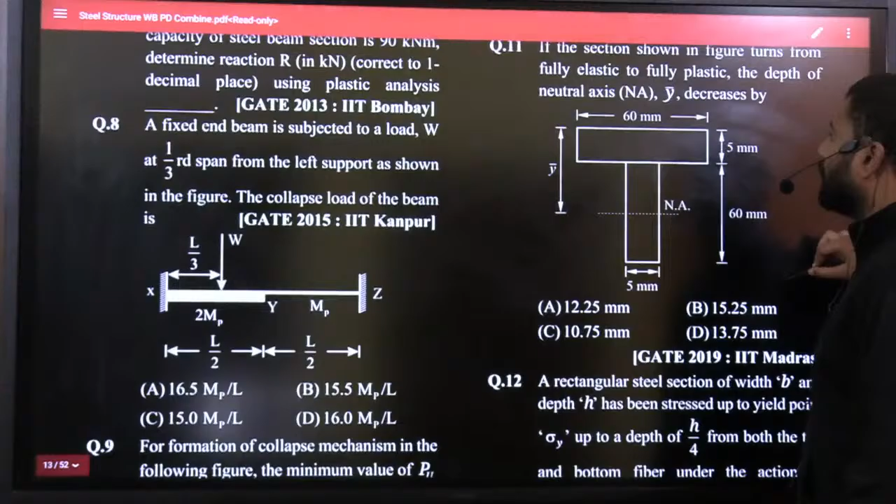Now, a fixed beam is subjected to a load W at 1/3 of the span from the left support as shown in the figure. The collapse load of the beam is? A fixed beam subjected to W at 1/3 of the span.

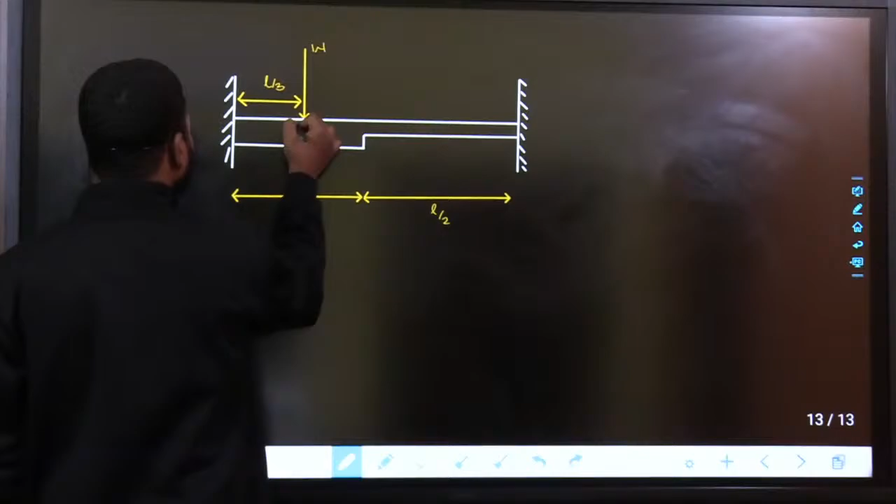This is L by 3, this is W, this is L by 2, this is also L by 2. Fine, and this is 2 MP, this is also MP. A fixed beam subjected to point load at a distance of L by 3 from here.

What is the collapse load he is asking? Try to find out the collapse load. I have already given you a hint over here. You just have to check all the criteria. That means for collapse load, external work done equals internal work done.

External work done equals internal work done. So here also check different criteria, and the minimum of all the collapse loads is your collapse load. So give me the answer.

One path, Prithviraj other path, and Patnaik third path. I am fourth path. Who are the other three paths? Please do comment other 3 paths also. Shihana, she came at the starting and she left. And what about these guys? Initially who came? Pradeep. Where did you go, Pradeep? Hi, Pradeep. Kuldeep. Hi, Kuldeep. Suhail Rathir. Hi, Suhail. Where are you guys? Neetu, where are you? Venkata Kalyan, how are you?

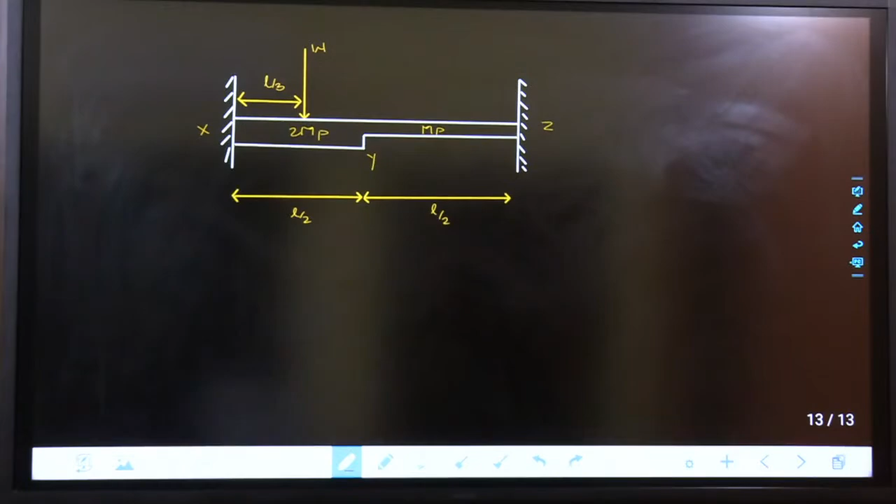Last 1 minute, guys. Last 1 minute. Time up.

Fine. So what is it that you have to do? What is ds? Static indeterminacy, r minus s. Number of reactions equals 4. Number of equilibrium equations is 2. So 4 minus 2 equals 2. So ds equals 2. Number of hinges required to be formed is ds plus 1, that equals 2 plus 1, which is 3.

What are the possible locations? It can form at x, y, z. I'll call this some p. X, y, z and p. Fine. So the first criteria, I'll take hinges forming at x, z and p.

Now see here, what is the moment? You will be taking 2 MP here. Let us say this is alpha, this is L by 3, this is 2L by 3. So L by 3 times alpha equals 2L by 3 times beta. This is beta. Next, at P it is also 2 MP. Here also it would be 2 MP. And here the member will have a strength of MP. And here it is alpha, here it is beta.

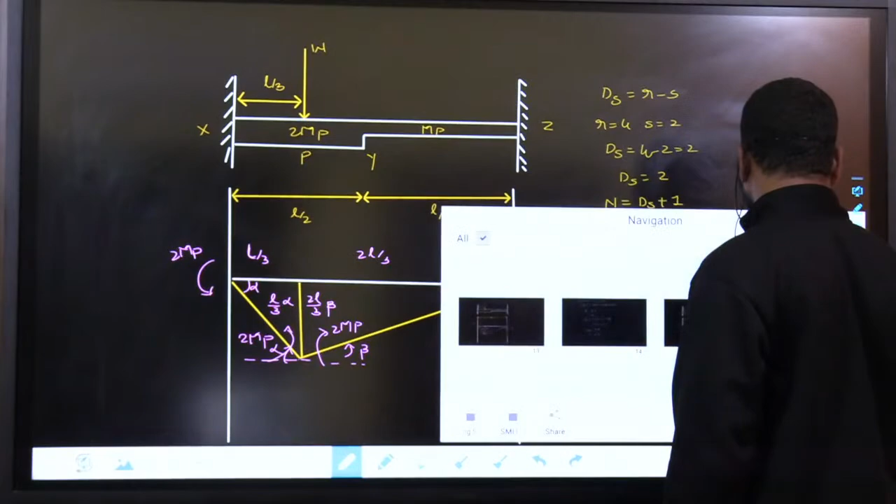This is one criteria where plastic hinges are formed at X, P and Z. Next criteria, plastic hinges forming at X, Y and Z.

X, Y and Z. Plastic hinges are forming at X, Y and Z. Here it is 2 MP. If two members of different moment capacities are meeting, first failure will occur in the weaker member, right? So here you will be taking MP. Here also you will be taking MP. Here also you will be taking MP.

If this is theta, this is theta, this is L by 2, this is also L by 2, this would be L by 2 times theta, and the load is here, fine. And if this is theta, this is L by 3, this will be L by 3 times theta, and this one is theta, this is also theta, fine. So external work done equals internal work done.

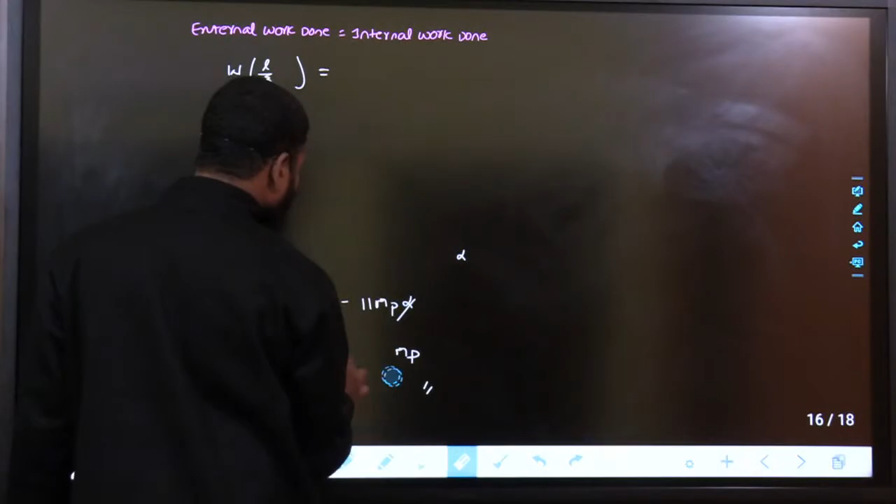If I have to write, W multiplied with L by 3 times theta equals 2 MP times theta plus MP times theta plus MP times theta plus MP times theta. So this value is 5 MP theta, that equals W L by 3 times theta. W equals 15 MP upon L. This is the collapse load from the second criteria, that is plastic hinges at X, Y and Z.

Next, the third criteria would be plastic hinges at X, P, Y. Fine. Plastic hinges at X, P, Y. If this is L by 3, this would be what? L by 6. That means if this is alpha, and I am taking this as beta, this would be 2 MP. Here also it is 2 MP, 2 MP, 2 MP, and here it is MP, because if two members of different capacities are meeting, failure will occur at the weaker member. This is MP, 2 MP, 2 MP, 2 MP.

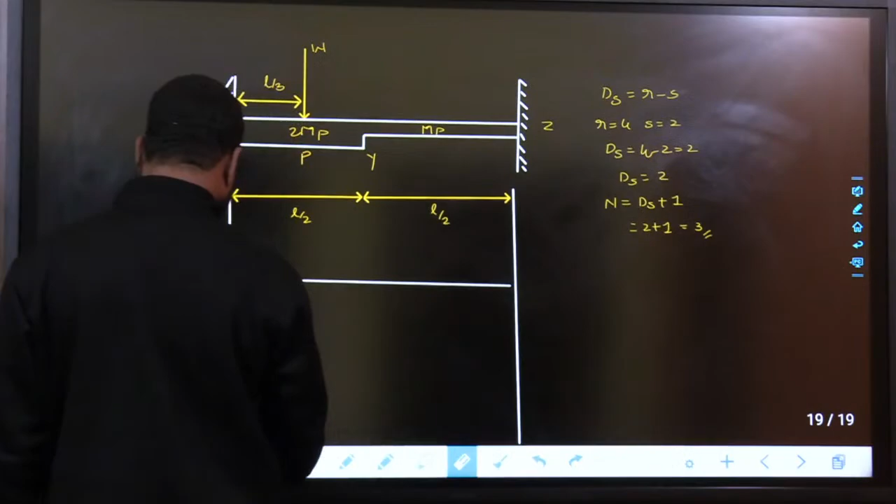The fourth criteria also you can check, that means at P, Y, Z, but it is of no use. Why is it of no use? Because work done by the external load will be 0. If I am taking plastic hinges at P, Y and Z, what is the work done by the external load? There is no movement here. External work done equals 0. So you don't have to check this criteria.

So the minimum of these three things. What is the minimum? The minimum is the collapse load. That is, collapse load equals 15 MP upon L. This is how you try to find out the collapse load. It might take time, but this is a worthwhile question. If you solve this question, then getting a better rank is very much possible, because many people can't solve this question. Okay, so the idea is very simple. You have to check all the criteria, and finally whichever is the minimum, you have to give that.

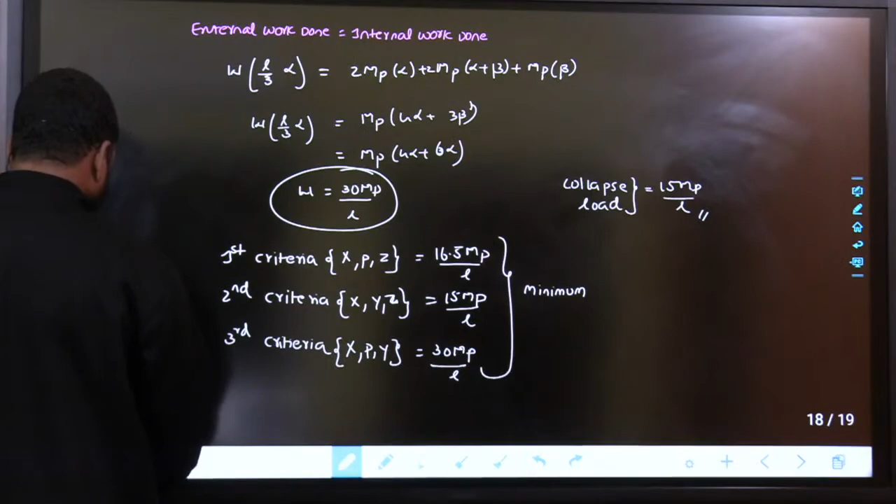Since I am explaining this to you, it took me this much time. If you solve it faster, you will solve it in 2 to 3 minutes, not a bigger issue. So collapse load is 15 MP upon L. Option is C. Any doubts in this? You can ask me. Any doubts? Please do comment, guys. Any doubts? Please do comment.

There is a person, Prudviraj. No doubts, sir. Can we get the PDF of the steel workbook? I don't think so, because it should be purchased from the GATE Academy website. You just have to purchase it. I can only give you problems here.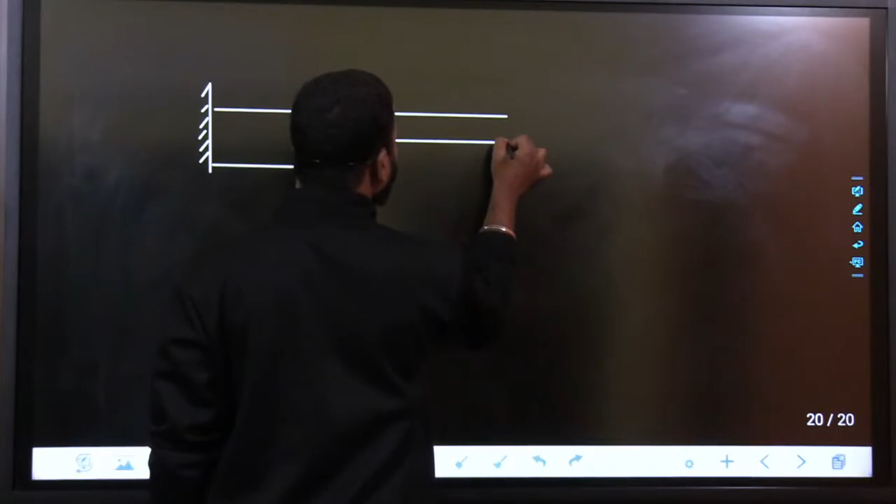So the question that is given to you is, there is a beam with a collapse load of Pu. This is 3 MP, this is 3 MP, and this one is MP. Okay, 1 meter, 2 meters, 2 meters. This is 2 meters. This is 1 meter. This is also 1 meter. 1 meter, 1 meter, 2 meters. This is Pu. So what is the collapse load? Please try to find out the collapse load Pu.

Time is 8:33. I'll give you time up to 8:36. Please make it fast.

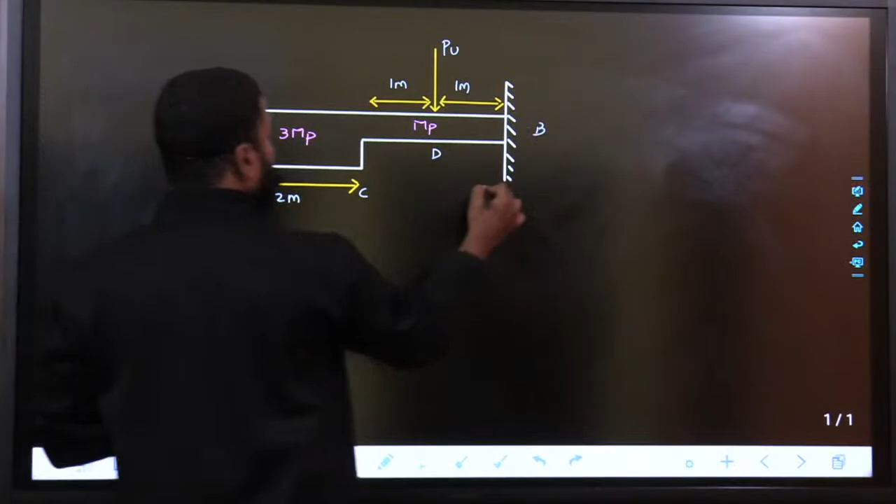The answer is 13.33. Okay, now I'll call these points A, B, C, D. First I'll take the A, B, C, D locations. This is alpha, this one is beta. Here it is 3MP, here also it is 3MP, and here it won't be 3MP. If two members meet, here it is MP, here it is MP, here it is MP. 2 plus 1, this is 3, this is 1. So 3 alpha equals beta, beta equals 3 alpha. Fine.

This is alpha, this one is beta. So external work done equals internal work done. What is external work done? W, or PU, multiplied with 3 alpha equals 3 MP alpha plus MP times alpha plus beta plus MP times beta. So this equals MP times 3 alpha plus alpha plus 2 beta, and MP times 4 alpha plus 2 times 3, that is 6 alpha, equals PU times 3 alpha. PU would be equal to 10 MP upon 3.

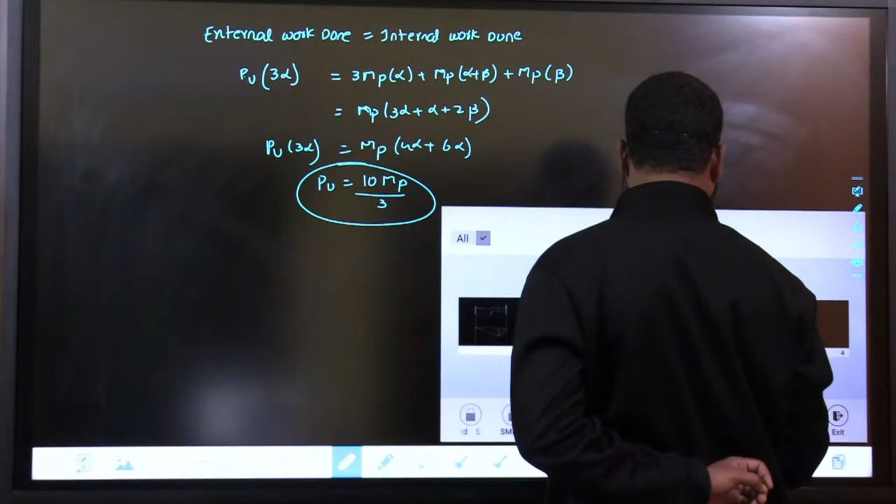PU equals 10 MP upon 3. This is one thing. Next, plastic hinges at A, B, C. If I take plastic hinges at A, B and C.

Here it is 3 MP, and here it is MP, here also it is MP. If this is theta, this is also theta, this is 2 meters, this is also 2 meters, this is 2 theta, this is also 2 theta. This is the load PU, and this distance would be 1 times theta. Here also it would be theta. External work done equals internal work done. PU times theta equals 3 MP times theta plus MP times theta plus MP times theta plus theta. So that is 3 MP plus 3, plus 2 is 5, plus 1 is 6, 6 MP times theta. So PU would be equal to 6 MP. Collapse load equals 6 MP.

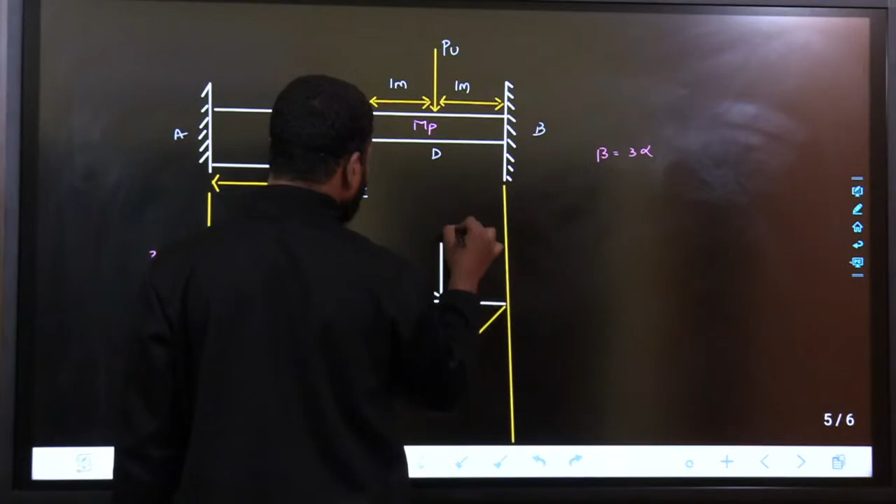Next, what would be the other criteria? The other criteria is formation of collapse at C, D and B. If this is PU, this is theta, this is also theta, this is MP times theta, this is also MP times theta, this is MP times theta, this is also MP times theta. So PU multiplied with theta, external work done, equals 4 times MP theta. PU times theta equals MP times theta plus MP times theta plus MP times theta plus theta. So PU equals 4 MP.

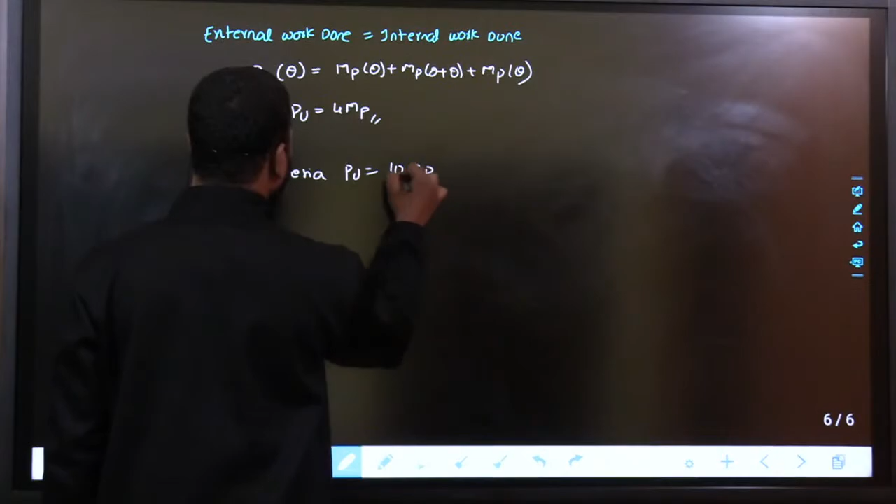And ACD is of no use because external work done would be equal to 0. So if you see, in the first criteria PU you got 10 MP upon 3. In the second criteria PU you got 6 MP. In the third criteria PU you got 4 MP. What is the minimum of these three? The first criteria is the minimum, so collapse load PU equals 10 MP upon 3. Fine.

And he said CMP upon L. What is L? L is 4 meters. CMP upon L, L is 4. So C value would be equal to 40 by 3. That is 13.33. Whatever that guy Prithviraj has got is correct.

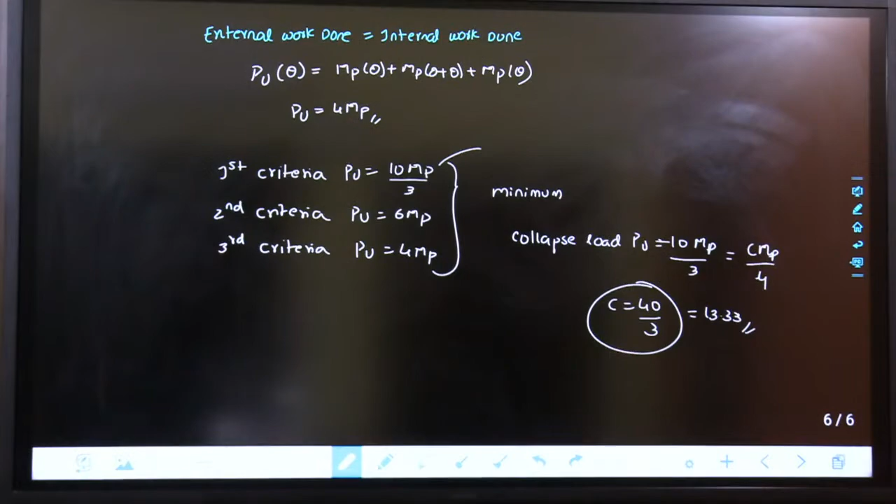Screen is blurred. Why is the screen blurred? For me the screen is looking good. Now please check it.

8 people are watching, I think. Yeah, only 8 people are watching. What is this 8? 1, 2, 3, 4, 5, 6, 7, 8. Why can't it be 80 people?

Anyway, this is how you solve this type of questions. And one person said it is clear. Fine, well and good. This is enough. If you have any other questions, please solve them.

Now Patnaik has asked a doubt. Sir, what is the kinematic and static method of solving the questions? See, whenever we are talking about the structure, first of all, you can use equilibrium equations, because the structure is in equilibrium. You can use equilibrium equations to find out the collapse load. Sigma Fy equals 0, summation of moment equals 0.

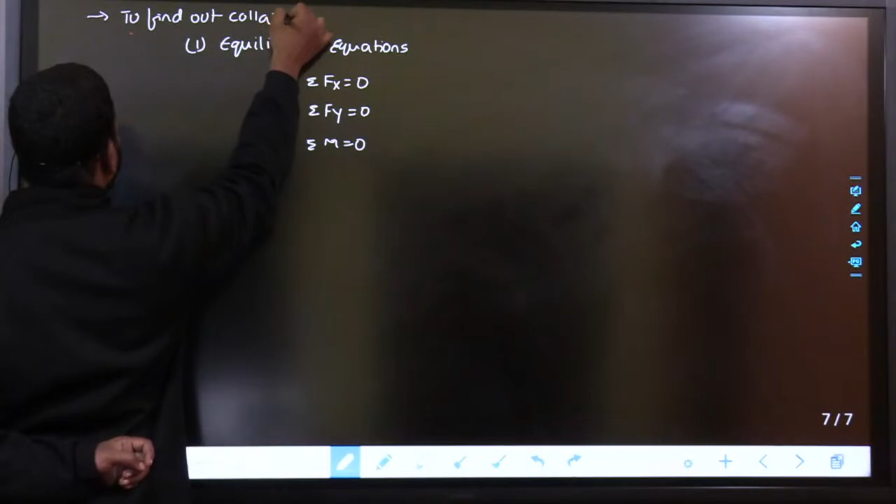So to find out the collapse load, first we can use equilibrium equations. Second one, mechanism condition. What exactly is the mechanism condition? The number of hinges formed should be sufficient to convert a structure into a mechanism. That means the number of hinges required to be formed is ds plus 1. So you have to convert a structure into a mechanism if a sufficient number of hinges are formed. That is another condition to find out the collapse load.

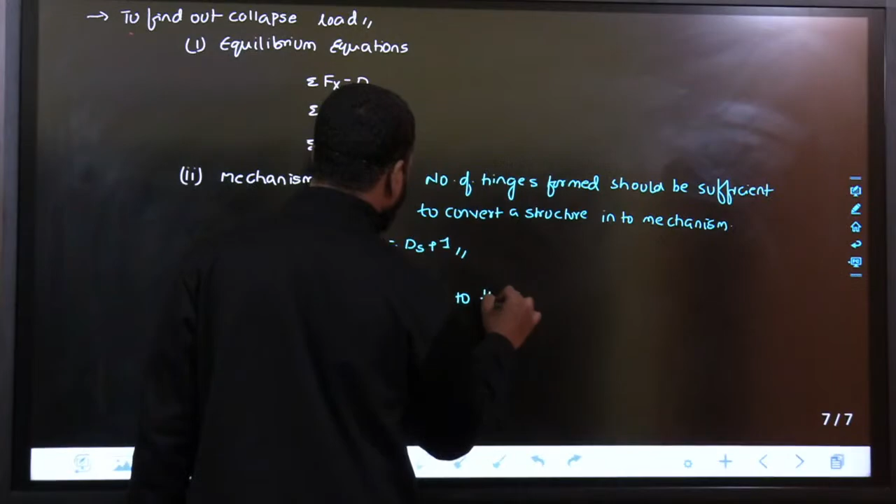And the third condition is the yield condition. According to this condition, the bending moment at any section should be less than the plastic moment capacity. Fine. With bending moment at any section within this limit, only then will failure not occur, right? This is another criterion. By using these three criteria, if you solve, you will get a collapse load. That is a unique collapse load.

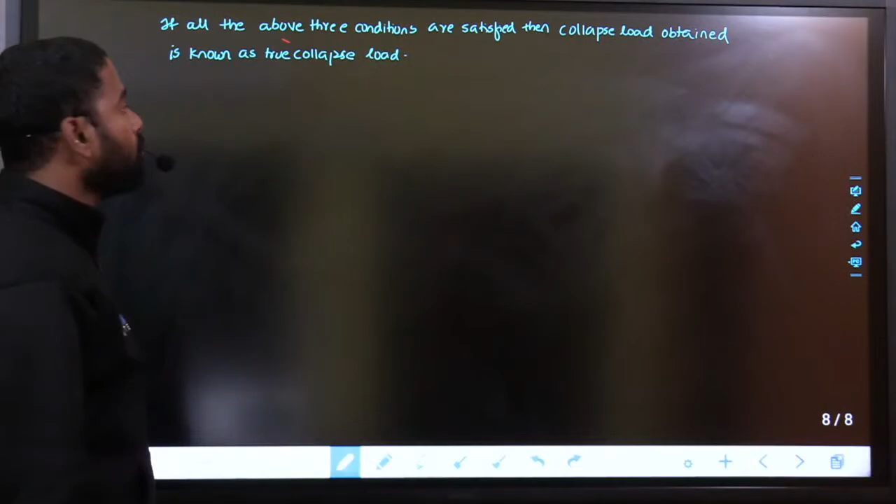Fine. If all the above three conditions are satisfied, then the collapse load obtained is known as the true collapse load. If all the three conditions are satisfied, then the collapse load obtained is known as the true collapse load. If any two of the conditions are satisfied, then you get different methods.

So the first one is the kinematic method. If the first condition and second condition are satisfied, or I can say if the equilibrium condition and mechanism condition are satisfied, then the method is called the kinematic method. And the collapse load obtained is more than or equal to the true collapse load. Collapse load obtained, P, is more than or equal to the true collapse load.

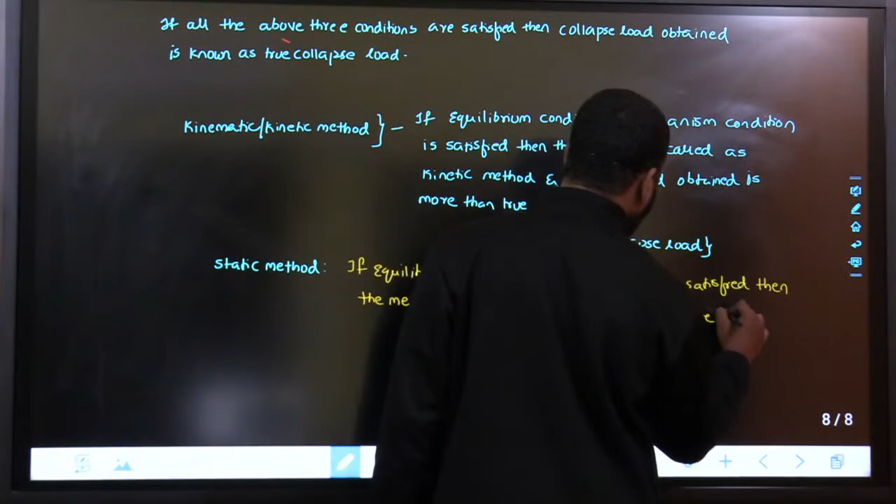Next, the static method. If the equilibrium condition and yield condition are satisfied, then the method is known as the static method. The collapse load obtained from this method is less than the true collapse load. That means P is less than or equal to PU, where PU is the true collapse load.

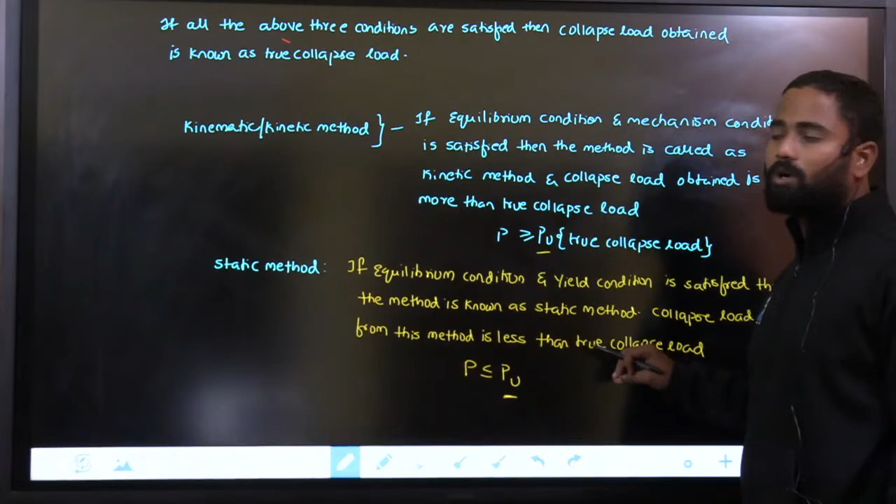This is whatever load is obtained by using these two equations. That means if you are using these two conditions to find out the collapse load, then it is called the static method. If you are using the other two, then it is called the kinematic method. This is also called the upper bound method. The kinematic method is also called the upper bound theorem, because the load obtained by this method is more than the true collapse load, and the load obtained by the static method is less than the true collapse load. So the static method is also called the lower bound method. But we are not using this; we are using the principle of virtual work to find out the unknowns or the collapse load.

Fine. Any doubts in this? You can ask me. Board is not visible. What happened here? For me, the board is visible over here on YouTube. What happened to you? Why is the board not visible? Please check your internet connection. For me it looks clear. I don't know about you. Please check your internet connection. Patnaik, I think your doubt is clear, I mean, your doubt is satisfied.